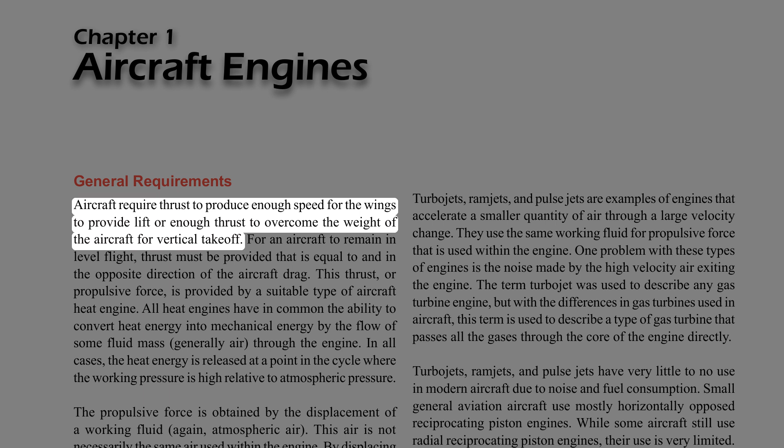Aircraft require thrust to produce enough speed for the wings to provide lift, or enough thrust to overcome the weight of the aircraft for vertical takeoff. For an aircraft to remain in level flight, thrust must be provided that is equal to and in the opposite direction of the aircraft drag.

This thrust, or propulsive force, is provided by a suitable type of aircraft heat engine. All heat engines have in common the ability to convert heat energy into mechanical energy by the flow of some fluid mass, generally air, through the engine. In all cases, the heat energy is released at a point in the cycle where the working pressure is high relative to atmospheric pressure. The propulsive force is obtained by the displacement of a working fluid, again, atmospheric air.

This air is not necessarily the same air used within the engine. By displacing air in a direction opposite to that in which the aircraft is propelled, thrust can be developed. This is an application of Newton's third law of motion, which states that for every action there is an equal and opposite reaction. So, as air is displaced to the rear, the aircraft is moved forward by this principle.

One misinterpretation of this principle is that air is pushing against the air behind the aircraft, making it move forward. This is not true. Rockets in space have no air to push against, yet they can produce thrust by using Newton's third law.

Atmospheric air is the principal fluid used for propulsion in every type of aircraft powerplant except the rocket, in which the total combustion gases are accelerated and displaced. The rocket must provide all the fuel and oxygen for combustion and does not depend on atmospheric air.

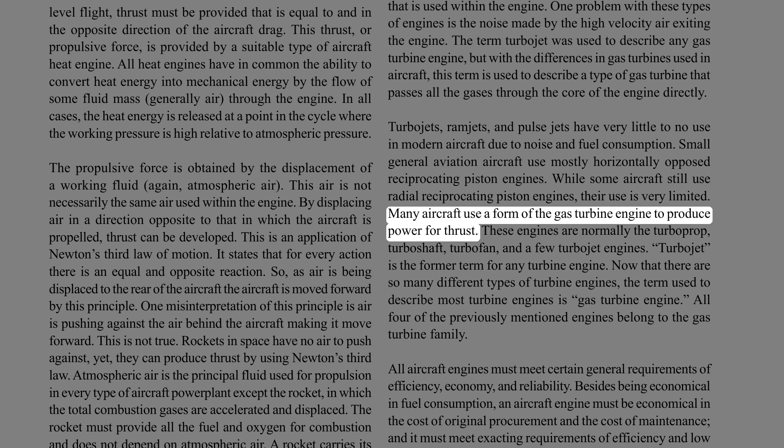Many aircraft use a form of the gas turbine engine to produce power for thrust. These engines are normally the turboprop, turboshaft, turbofan, and a few turbojet engines. Turbojet is the former term for any turbine engine. Now that there are so many different types of turbine engines, the term used to describe most turbine engines is gas turbine engine. All four of the previously mentioned engines belong to the gas turbine family.

All aircraft engines must meet certain general requirements of efficiency, economy, and reliability. Besides being economical in fuel consumption, an aircraft engine must be economical in the cost of original procurement and the cost of maintenance, and it must meet exacting requirements of efficiency and low weight-to-horsepower ratio.

It must be capable of sustained high power output with no sacrifice in reliability. It must also have the durability to operate for long periods of time between overhauls. It needs to be as compact as possible yet have easy accessibility for maintenance. It is required to be as vibration-free as possible and be able to cover a wide range of power output at various speeds and altitudes.

These requirements dictate the use of ignition systems that deliver the firing impulse to the spark plugs at the proper time in all kinds of weather and under other adverse conditions. Engine fuel delivery systems provide metered fuel at the correct proportion to the air ingested by the engine, regardless of the attitude, altitude, or type of weather in which the engine is operated.

The engine needs a type of oil system that delivers oil under the proper pressure to lubricate and cool all of the operating parts of the engine when it is running. Also, it must have a system of damping units to damp out the vibrations of the engine when it is operating. Power and weight: the useful output of all aircraft power plants is thrust, the force which propels the aircraft.

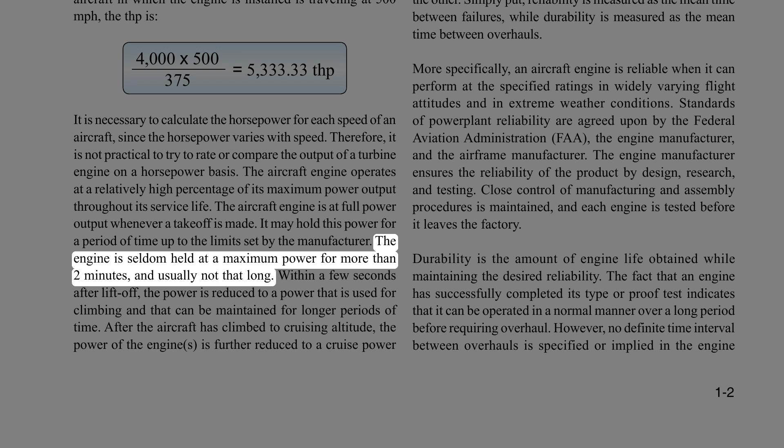The aircraft engine is at full power output whenever a takeoff is made. It may hold this power for a period of time up to the limits set by the manufacturer. The engine is seldom held at maximum power for more than 2 minutes, and usually not that long. Within a few seconds after liftoff, the power is reduced to a power that is used for climbing.

That can be maintained for longer periods of time. After the aircraft has climbed to cruising altitude, the power of the engines is further reduced to a cruise power, which can be maintained for the duration of the flight.

If the weight of an engine per brake horsepower, called the specific weight of the engine, is decreased, the useful load that an aircraft can carry and the performance of the aircraft obviously are increased. Every excess pound of weight carried by an aircraft engine reduces its performance.

Tremendous improvement in reducing the weight of the aircraft engine through improved design and metallurgy has resulted in reciprocating engines with a much improved power-to-weight ratio, or specific weight.

Fuel economy: the basic parameter for describing the fuel economy of aircraft engines is usually specific fuel consumption. Specific fuel consumption for gas turbines is the fuel flow, measured in pounds per hour, divided by thrust in pounds, and for reciprocating engines, the fuel flow in pounds per hour divided by brake horsepower. These are called thrust-specific fuel consumption and brake-specific fuel consumption, respectively.

Equivalent specific fuel consumption is used for the turboprop engine, and is the fuel flow in pounds per hour divided by a turboprop's equivalent shaft horsepower.

Comparisons can be made between the various engines on a specific fuel consumption basis. At low speed, the reciprocating and turboprop engines have better economy than the pure turbojet or turbofan engines. However, at high speed, because of losses in propeller efficiency, the reciprocating or turboprop engine's efficiency becomes limited above 400 miles per hour, less than that of the turbofan.

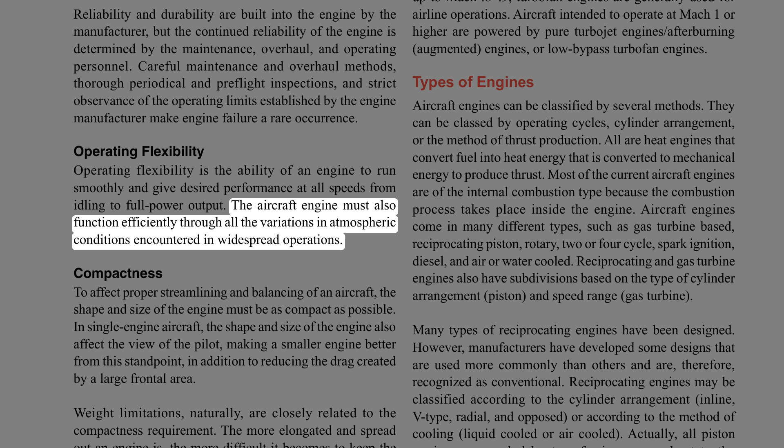Operating flexibility is the ability of an engine to run smoothly and give desired performance at all speeds, from idling to full power output. The aircraft engine must also function efficiently through all the variations in atmospheric conditions encountered in widespread operations.

Compactness. To effect proper streamlining and balancing of an aircraft, the shape and size of the engine must be as compact as possible. In single-engine aircraft, the shape and size of the engine also affect the view of the pilot, making a smaller engine better from this standpoint, in addition to reducing the drag created by a large frontal area.

Weight limitations, naturally, are closely related to the compactness requirement. The more elongated and spread out an engine is, the more difficult it becomes to keep the specific weight within the allowable limits. Powerplant selection, engine-specific weight and specific fuel consumption were discussed in the previous paragraphs, but for certain design requirements, the final powerplant selection may be based on factors other than those that can be discussed from an analytical point of view. For that reason, a general discussion of powerplant selection follows.

For aircraft whose cruising speed does not exceed 250 miles per hour, the reciprocating engine is the usual choice of powerplant. When economy is required in the low speed range, the conventional reciprocating engine is chosen because of its excellent efficiency and relatively low cost.

When high-altitude performance is required, the turbo-supercharged reciprocating engine may be chosen because it is capable of maintaining rated power to a high altitude, above 30,000 feet. Gas turbine engines operate most economically at high altitudes. Although in most cases the gas turbine engine provides superior performance, the cost of gas turbine engines is a limiting factor.

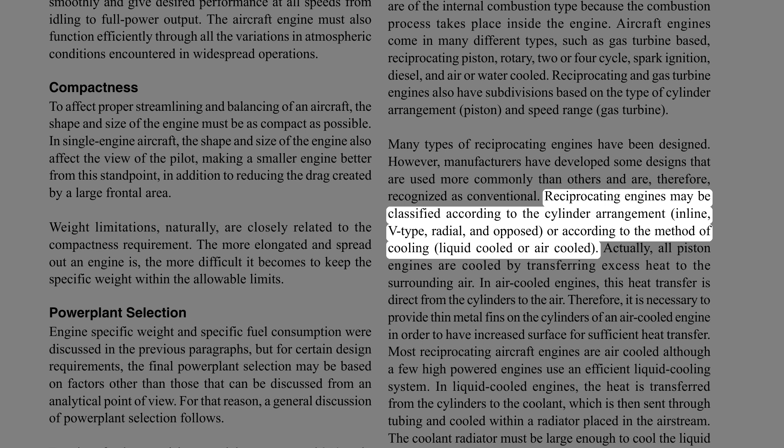Actually, all piston engines are cooled by transferring excess heat to the surrounding air. In air-cooled engines, this heat transfer is direct from the cylinders to the air. Therefore, it is necessary to provide thin metal fins on the cylinders of an air-cooled engine in order to have increased surface for sufficient heat transfer.

Most reciprocating aircraft engines are air-cooled, although a few high-powered engines use an efficient liquid cooling system. In liquid-cooled engines, the heat is transferred from the cylinders to the coolant, which is then sent through tubing and cooled within a radiator placed in the airstream. The coolant radiator must be large enough to cool the liquid efficiently.

The main problem with liquid cooling is the added weight of coolant, heat exchanger, radiator, and tubing to connect the components. Liquid-cooled engines do allow high power to be obtained from the engine safely.

Inline engines. An inline engine generally has an even number of cylinders, although some 3-cylinder engines have been constructed. This engine may be either liquid-cooled or air-cooled and has only one crankshaft, which is located either above or below the cylinders. If the engine is designed to operate with the cylinders below the crankshaft, it is called an inverted engine. The inline engine has a small frontal area and is better adapted to streamlining.

When mounted with the cylinders in an inverted position, it offers the added advantages of a shorter landing gear and greater pilot visibility. With increase in engine size, the air-cooled, inline type offers additional problems to provide proper cooling. Therefore, this type of engine is confined to low and medium horsepower engines used in very old light aircraft.

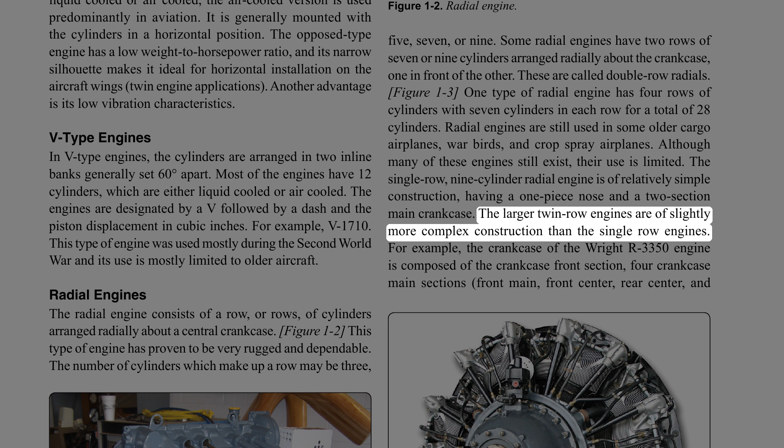The single-row, 9-cylinder radial engine is of relatively simple construction, having a one-piece nose and a 2-section main crankcase. The larger twin-row engines are of slightly more complex construction than the single-row engines. For example, the crankcase of the Wright R3350 engine is composed of the crankcase front section, 4 crankcase main sections, front main, front center, and rear main, rear cam and tappet housing, supercharger front housing, supercharger rear housing, and supercharger rear housing cover. Pratt & Whitney engines of comparable size incorporate the same basic sections, although the construction and the nomenclature differ considerably.

Reciprocating engines. Design and construction. The basic major components of a reciprocating engine are the crankcase, cylinders, pistons, connecting rods, valves, valve operating mechanism, and crankshaft. In the head of each cylinder are the valves and spark plugs. One of the valves is in a passage leading from the induction system, the other is in a passage leading to the exhaust system. Inside each cylinder is a movable piston connected to a crankshaft by a connecting rod. Figure 1-4 illustrates the basic parts of a reciprocating engine.

Crankcase section. The foundation of an engine is the crankcase. It contains the bearings and bearing supports in which the crankshaft revolves. Besides supporting itself, the crankcase must provide a tight enclosure for the lubricating oil and must support various external and internal mechanisms of the engine. It also provides support for attachment of the cylinder assemblies and the power plant to the aircraft.

It must be sufficiently rigid and strong to prevent misalignment of the crankshaft and its bearings. Cast or forged aluminum alloy is generally used for crankcase construction because it is light and strong. The crankcase is subjected to many variations of mechanical loads and other forces.

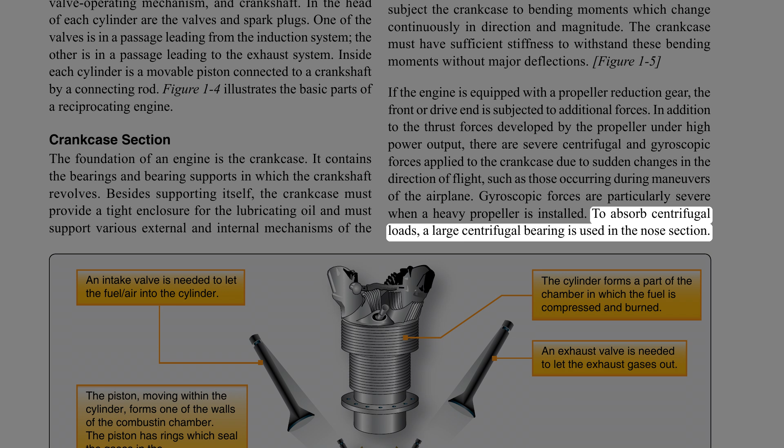To absorb centrifugal loads, a large centrifugal bearing is used in the nose section. The shape of the nose or front of the crankcase section varies considerably. In general, it is either tapered or round.

Depending upon the type of reciprocating engine, the nose or front area of the crankcase varies somewhat. If the propeller is driven directly by the crankshaft, less area is needed for this component of the engine. The crankcases used on engines having opposed or inline cylinder arrangements vary in form for different types of engines, but in general they are approximately cylindrical.

One or more sides are surfaced to serve as a base to which the cylinders are attached by means of cap screws, bolts, or studs. These accurately machined surfaces are frequently referred to as cylinder pads.

If the propeller is driven by reduction gearing, gears that slow down the speed of the propeller relative to the engine, more area is required to house the reduction gears. A tapered nose section is used quite frequently on direct drive, low-powered engines, because extra space is not required to house the propeller reduction gears.

Crankcase nose sections are usually cast of either aluminum alloy or magnesium. The crankcase nose section on engines that develop from 1,000 to 2,500 horsepower is usually larger to house reduction gears, and sometimes ribbed to get as much strength as possible.

The governor is used to control propeller speed and blade angle. The mounting of the propeller governor varies. On some engines, it is located on the rear section, although this complicates the installation, especially if the propeller is operated or controlled by oil pressure, because of the distance between the governor and propeller.

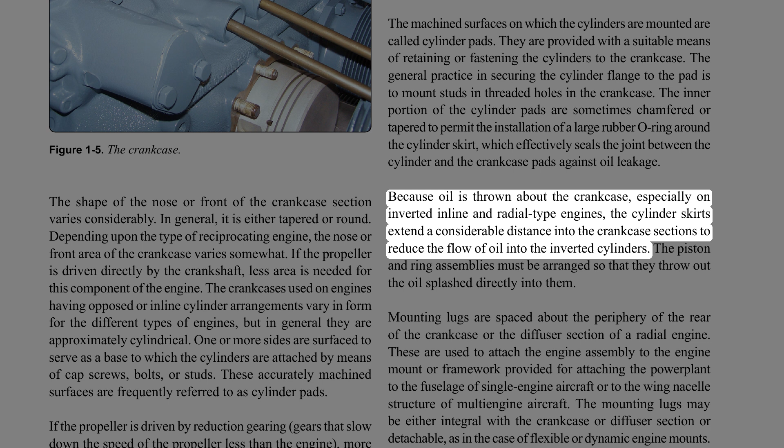Because oil is thrown about the crankcase, especially on inverted inline and radial type engines, the cylinder skirts extend a considerable distance into the crankcase sections to reduce the flow of oil into the inverted cylinders. The piston and ring assemblies must be arranged so that they throw out the oil splashed directly into them.

Mounting lugs are spaced about the periphery of the rear of the crankcase or the diffuser section of a radial engine. These are used to attach the engine assembly to the engine mount or framework provided for attaching the power plant to the fuselage of single-engine aircraft or to the wing nacelle structure of multi-engine aircraft.

The mounting lugs may be either integral with the crankcase or diffuser section, or detachable, as in the case of flexible or dynamic engine mounts. The mounting arrangement supports the entire power plant including the propeller, and therefore is designed to provide ample strength for rapid maneuvers or other loadings.

Because of the elongation and contraction of the cylinders, the intake pipes which carry the mixture from the diffuser chamber through the intake valve ports are arranged to provide a slip joint which must be leak-proof.

The atmospheric pressure on the outside of the case of an unsupercharged engine is higher than on the inside, especially when the engine is operating at idling speed. If the engine is equipped with a supercharger and operated at full throttle, the pressure is considerably higher on the inside than on the outside of the case.

If the slip joint connection has a slight leakage, the engine may idle fast due to a slight leaning of the mixture. If the leak is quite large, it may not idle at all. At open throttle, a small leak probably would not be noticeable in operation of the engine, but the slight leaning of the air-fuel mixture might cause detonation or damage to the valves and valve seats.

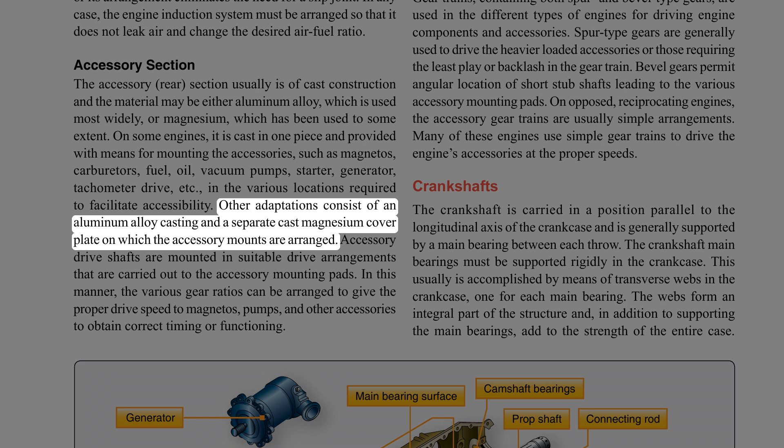Other adaptations consist of an aluminum alloy casting and a separate cast magnesium cover plate on which the accessory mounts are arranged. Accessory drive shafts are mounted in suitable drive arrangements that are carried out to the accessory mounting pads. In this manner, the various gear ratios can be arranged to give the proper drive speed to magnetos, pumps, and other accessories to obtain correct timing or functioning.

Accessory gear trains. Gear trains, containing both spur and bevel type gears, are used in the different types of engines for driving engine components and accessories. Spur-type gears are generally used to drive the heavier loaded accessories, or those requiring the least play or backlash in the gear train. Bevel gears permit angular location of short stub shafts leading to the various accessory mounting pads.

On opposed, reciprocating engines, the accessory gear trains are usually simple arrangements. Many of these engines use simple gear trains to drive the engine's accessories at the proper speeds.

Crankshafts. The crankshaft is carried in a position parallel to the longitudinal axis of the crankcase and is generally supported by a main bearing between each throw. The crankshaft main bearings must be supported rigidly in the crankcase. This usually is accomplished by means of transverse webs in the crankcase, one for each main bearing.

The webs form an integral part of the structure and, in addition to supporting the main bearings, add to the strength of the entire case.

The crankcase is divided into two sections in a longitudinal plane. This division may be in the plane of the crankshaft, so that one half of the main bearing, and sometimes camshaft bearings, are carried in one section of the case and the other half in the opposite section.

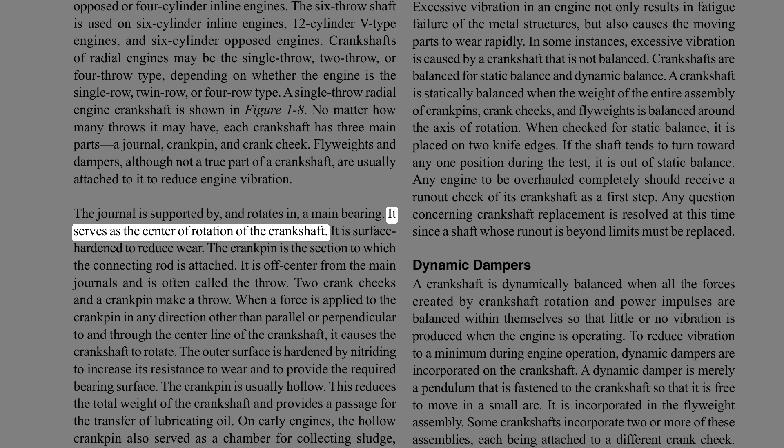The journal is supported by, and rotates in, a main bearing. It serves as the center of rotation of the crankshaft. It is surface hardened to reduce wear.

The crankpin is the section to which the connecting rod is attached. It is off-center from the main journals and is often called the throw. Two crank cheeks and a crankpin make a throw.

When a force is applied to the crankpin in any direction other than parallel or perpendicular to and through the center line of the crankshaft, it causes the crankshaft to rotate. The outer surface is hardened by nitriding to increase its resistance to wear and to provide the required bearing surface. The crankpin is usually hollow.

This reduces the total weight of the crankshaft and provides a passage for the transfer of lubricating oil. On early engines, the hollow crankpin also served as a chamber for collecting sludge, carbon deposits, and other foreign material. Centrifugal force threw these substances to the outside of the chamber and kept them from reaching the connecting rod bearing surface. Due to the use of ashless dispersant oils, newer engines no longer use sludge chambers.

On some engines, a passage is drilled in the crank cheek to allow oil from the hollow crankshaft to be sprayed on the cylinder walls. The crank cheek connects the crankpin to the main journal. In some designs, the cheek extends beyond the journal and carries a flyweight to balance the crankshaft. The crank cheek must be of sturdy construction to obtain the required rigidity between the crankpin and the journal.

In all cases, the type of crankshaft and the number of crankpins must correspond with the cylinder arrangement of the engine. The position of the cranks on the crankshaft in relation to the other cranks of the same shaft is expressed in degrees. The simplest crankshaft is the single-throw or 360 degree type. This type is used in a single-row radial engine. It can be constructed in one or two pieces. Two main bearings, one on each end, are provided when this type of crankshaft is used.

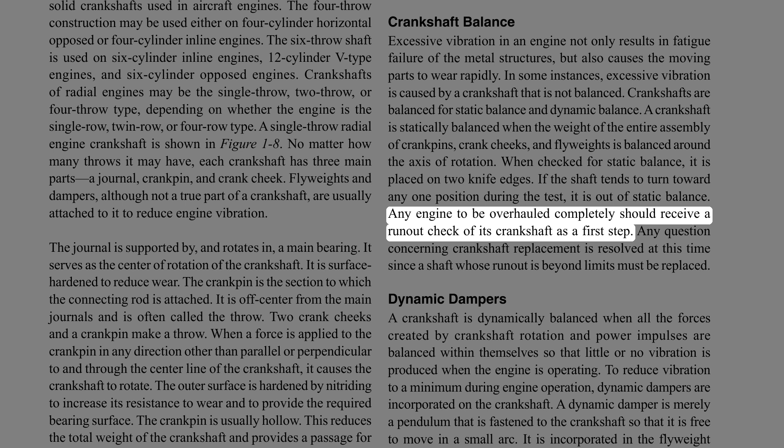Any engine to be overhauled completely should receive a runout check of its crankshaft as a first step. Any question concerning crankshaft replacement is resolved at this time, since a shaft whose runout is beyond limits must be replaced.

Dynamic dampers. A crankshaft is dynamically balanced when all the forces created by crankshaft rotation and power impulses are balanced within themselves so that little or no vibration is produced when the engine is operating. To reduce vibration to a minimum during engine operation, dynamic dampers are incorporated on the crankshaft.

A dynamic damper is merely a pendulum that is fastened to the crankshaft so that it is free to move in a small arc. It is incorporated in the flyweight assembly. Some crankshafts incorporate two or more of these assemblies, each being attached to a different crank cheek.

The distance the pendulum moves, and thus its vibrating frequency, corresponds to the frequency of the power impulses of the engine. When the vibration frequency of the crankshaft occurs, the pendulum oscillates out of time with the crankshaft vibration, thus reducing vibration to a minimum.

The construction of the dynamic damper used in one engine consists of a movable slotted steel flyweight attached to the crank cheek. Two spool-shaped steel pins extend into the slot and pass through oversized holes in the flyweight and crank cheek. The difference in diameter between the pins and the holes provides a pendulum effect. An analogy of the functioning of a dynamic damper is shown in Figure 1-9.

Connecting rods. The connecting rod is the link that transmits forces between the piston and the crankshaft. Connecting rods must be strong enough to remain rigid under load, yet light enough to reduce the inertia forces produced when the rod and piston stop, change direction, and start again at the end of each stroke. There are four types of connecting rod assemblies: plain, fork and blade, master and articulated, and split type.

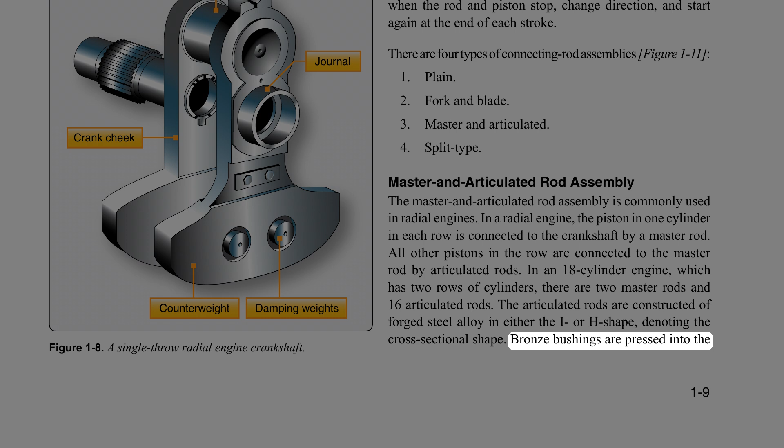The articulated rods are constructed of forged steel alloy in either the I or H shape, denoting the cross-sectional shape. Bronze bushings are pressed into the bores in each end of the articulated rod to provide knuckle pin and piston pin bearings.

The master rod serves as the connecting link between the piston pin and the crankpin. The crankpin end, or big end, contains the crankpin or master rod bearing. Flanges around the big end provide for the attachment of the articulated rods, which are attached to the master rod by knuckle pins pressed into holes in the master rod flanges during assembly. A plain bearing, usually called a piston pin bushing, is installed in the piston end of the master rod to receive the piston pin.

When a crankshaft of the split spline or split clamp type is employed, a one-piece master rod is used. The master and articulated rods are assembled and then installed on the crankpin, and the crankshaft sections are then joined together.

In engines that use the one-piece type of crankshaft, the big end of the master rod is split, as is the master rod bearing. The main part of the master rod is installed on the crankpin, then the bearing cap is set in place and bolted to the master rod.

The centers of the knuckle pins do not coincide with the center of the crankpin. Thus, while the crankpin center describes a true circle for each revolution of the crankshaft, the centers of the knuckle pins describe an elliptical path. These elliptical paths are symmetrical about a center line through the master rod cylinder. The major diameters of the ellipses are not the same, so the link rods have varying degrees of angularity relative to the center of the crankthrow.

Because of the varying angularity of the link rods and the elliptical motion of the knuckle pins, all pistons do not move an equal amount in each cylinder for a given number of degrees of crankthrow movement. This variation in piston position between cylinders can have considerable effect on engine operation. To minimize these effects on valve and ignition timing, the knuckle pinholes in the master rod flange are not equidistant from the center of the crankpin, offsetting to an extent the effect of the link rod angularity. Another method of minimizing the adverse effects on engine operation is to use a compensated magneto.

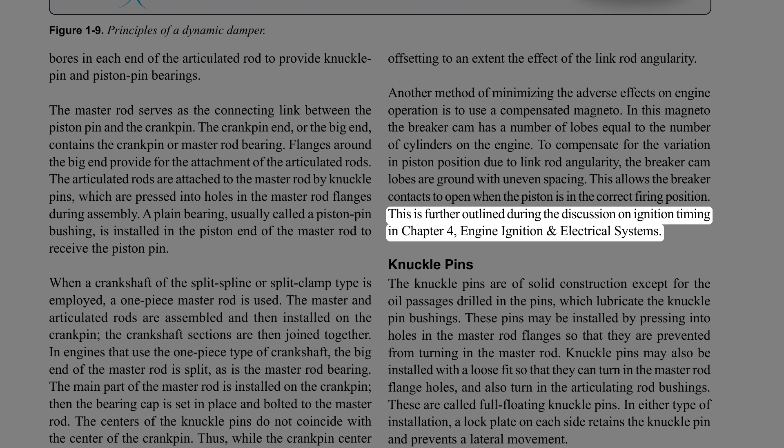In this magneto, the breaker cam has a number of lobes equal to the number of cylinders on the engine. To compensate for the variation in piston position due to link rod angularity, the breaker cam lobes are ground with uneven spacing. This allows the breaker contacts to open when the piston is in the correct firing position. This is further outlined during the discussion on ignition timing in Chapter 4, Engine Ignition and Electrical Systems.

Knuckle pins are of solid construction except for the oil passages drilled in the pins, which lubricate the knuckle pin bushings. These pins may be installed by pressing into holes in the master rod flanges so they are prevented from turning in the master rod. Knuckle pins may also be installed with a loose fit so that they can turn in the master rod flange holes, and also turn in the articulating rod bushings. These are called full floating knuckle pins. In either type of installation, a lock plate on each side retains the knuckle pin and prevents lateral movement.

Plain type connecting rods are used in inline and opposed engines. The end of the rod attached to the crankpin is fitted with a cap and a two-piece bearing, held on by bolts or studs. To maintain proper fit and balance, connecting rods should always be replaced in the same cylinder and in the same relative position.

Fork and blade rod assembly. The fork and blade rod assembly is used primarily in V-type engines. The forked rod is split at the crankpin end to allow space for the blade rod to fit between the prongs. A single two-piece bearing is used on the crankshaft end of the rod. This type of connecting rod is not used much on modern engines.

Pistons. The piston of a reciprocating engine is a cylindrical member which moves back and forth within a steel cylinder, acting as a moving wall within the combustion chamber. As the piston moves down, it draws in the air-fuel mixture. As it moves upward, it compresses the charge, ignition occurs, and the expanding gases force the piston downward. This force is transmitted to the crankshaft through the connecting rod. On the return upward stroke, the piston forces the exhaust gases from the cylinder and the cycle repeats. Piston construction: the majority of aircraft engine pistons are machined from aluminum alloy forgings.

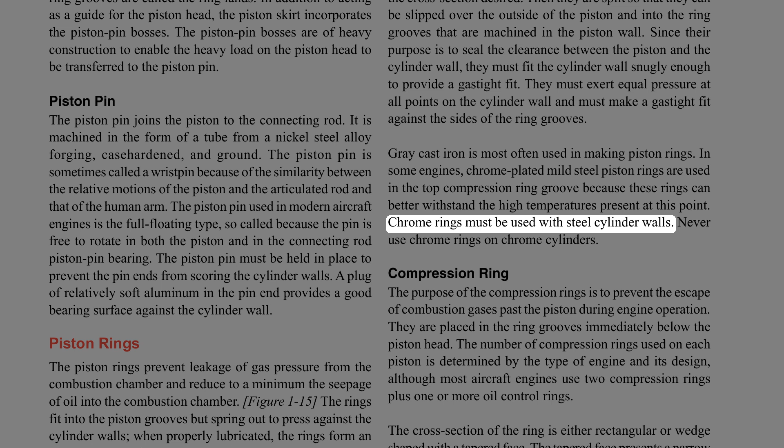Gray cast iron is most often used in making piston rings. In some engines, chrome-plated mild steel piston rings are used in the top compression ring groove because these rings can better withstand the high temperatures present at this point. Chrome rings must be used with steel cylinder walls. Never use chrome rings on chrome cylinders.

Compression ring. The purpose of the compression rings is to prevent the escape of combustion gases past the piston during engine operation. They are placed in the ring grooves immediately below the piston head. The number of compression rings used on each piston is determined by the type of engine and its design, although most aircraft engines use 2 compression rings plus 1 or more oil control rings.

The cross-section of the ring is either rectangular or wedge-shaped with a tapered face. The tapered face presents a narrow bearing edge to the cylinder wall, which helps to reduce friction and provide better sealing. Oil control rings.

Oil control rings are placed in the grooves immediately below the compression rings and above the piston pin bores. There may be one or more oil control rings per piston. Two rings may be installed in the same groove, or they may be installed in separate grooves.

Oil control rings regulate the thickness of the oil film on the cylinder wall. If too much oil enters the combustion chamber, it burns and leaves a thick coating of carbon on the combustion chamber walls, the piston head, the spark plugs, and the valve heads. This carbon can cause the valves and piston rings to stick if it enters the ring grooves or valve guides. In addition, the carbon can cause spark plug misfiring as well as detonation, pre-ignition, or excessive oil consumption.

To allow the surplus oil to return to the crankcase, holes are drilled in the bottom of the oil control piston ring grooves or in the lands next to these grooves.

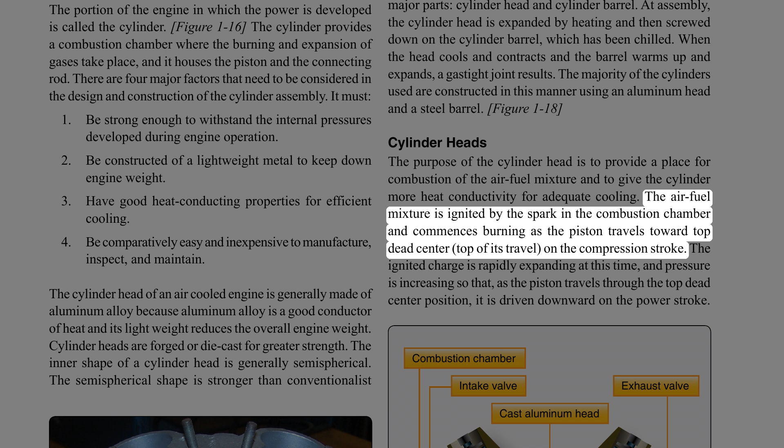Cylinder heads. The purpose of the cylinder head is to provide a place for combustion of the air-fuel mixture and to give the cylinder more heat conductivity for adequate cooling. The air-fuel mixture is ignited by the spark in the combustion chamber and commences burning as the piston travels toward top dead center, top of its travel, on the compression stroke.

The ignited charge is rapidly expanding at this time, and pressure is increasing so that, as the piston travels through the top dead center position, it is driven downward on the power stroke. The intake and exhaust valve ports are located in the cylinder head along with the spark plugs and the intake and exhaust valve actuating mechanisms.

After the cylinder head is cast, the spark plug bushings, valve guides, rocker arm bushings, and valve seats are installed in the cylinder head. Spark plug openings may be fitted with bronze or steel bushings that are shrunk and screwed into the openings. Stainless steel heli-coil spark plug inserts are used in many engines currently manufactured. Bronze or steel valve guides are usually shrunk or screwed into drilled openings in the cylinder head to provide guides for the valve stems. These are generally located at an angle to the center line of the cylinder.

The valve seats are circular rings of hardened metal that protect the relatively soft metal of the cylinder head from the hammering action of the valves as they open and close, and from the exhaust gases. The cylinder heads of air-cooled engines are subjected to extreme temperatures. It is therefore necessary to provide adequate cooling fin area and to use metals that conduct heat rapidly. Cylinder heads of air-cooled engines are usually cast or forged. Aluminum alloy is used in the construction for a number of reasons.

It is well adapted for casting or for the machining of deep, closely spaced fins, and it is more resistant than most metals to the corrosive attack of tetraethyl lead in gasoline.

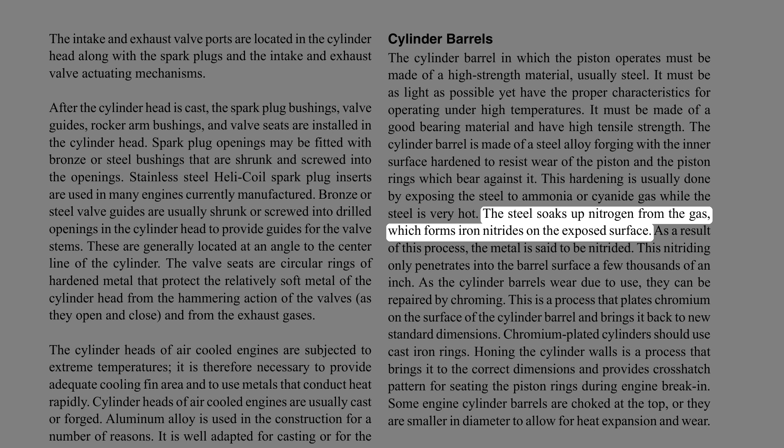The cylinder barrel is made of a steel alloy forging with the inner surface hardened to resist wear of the piston and the piston rings which bear against it. This hardening is usually done by exposing the steel to ammonia or cyanide gas while the steel is very hot. The steel soaks up nitrogen from the gas, which forms iron nitrides on the exposed surface. As a result of this process, the metal is said to be nitrided. This nitriding only penetrates into the barrel surface a few thousandths of an inch.

As the cylinder barrels wear due to use, they can be repaired by chroming. This is a process that plates chromium on the surface of the cylinder barrel and brings it back to new standard dimensions. Chromium-plated cylinders should use cast iron rings.

Honing the cylinder walls is a process that brings it to the correct dimensions and provides a crosshatch pattern for seating the piston rings during engine break-in.

Some engine cylinder barrels are choked at the top, or they are smaller in diameter to allow for heat expansion and wear. In some instances, the barrel has threads on the outside surface at one end so that it can be screwed into the cylinder head. The cooling fins are machined as an integral part of the barrel and have limits on repair and service.

Cylinder numbering. Occasionally it is necessary to refer to the left or right side of the engine or to a particular cylinder. Therefore, it is necessary to know the engine directions and how cylinders of an engine are numbered. The propeller shaft end of the engine is always the front end, and the accessory end is the rear end, regardless of how the engine is mounted in an aircraft.

When referring to the right side or left side of an engine, always assume the view is from the rear or accessory end. As seen from this position, crankshaft rotation is referred to as either clockwise or counterclockwise.

Inline and V-type engine cylinders are usually numbered from the rear. In V engines, the cylinder banks are known as the right bank and the left bank, as viewed from the accessory end.

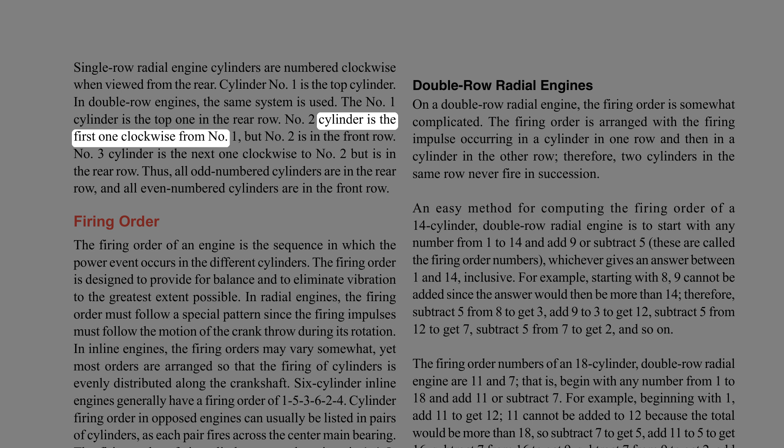Valve construction. The valves in the cylinders of an aircraft engine are subjected to high temperatures, corrosion, and operating stresses. Thus, the metal alloy in the valves must be able to resist all these factors.

Because intake valves operate at lower temperatures than exhaust valves, they can be made of chrome-nickel steel. Exhaust valves are usually made of nichrome, silchrome, or cobalt chromium steel because these materials are much more heat resistant.

The valve head has a ground face that forms a seal against the ground valve seat in the cylinder head when the valve is closed. The face of the valve is usually ground to an angle of either 30 degrees or 45 degrees.

In some engines, the intake valve face is ground to an angle of 30 degrees, and the exhaust valve face is ground to a 45 degrees angle.

Valve faces are often made more durable by the application of a material called stellite. About 1/16 inch of this alloy is welded to the valve face and ground to the correct angle. Stellite is resistant to high-temperature corrosion and also withstands the shock and wear associated with valve operation. Some engine manufacturers use a nichrome facing on the valves.

This serves the same purpose as the stellite material. The valve stem acts as a pilot for the valve head and rides in the valve guide installed in the cylinder head for this purpose. The valve stem is surface hardened to resist wear.

The neck is the part that forms the junction between the head and the stem. The tip of the valve is hardened to withstand the hammering of the valve rocker arm as it opens the valve. A machined groove on the stem near the tip receives the split ring stem keys, which form a lock ring to hold the valve spring retaining washer in place.

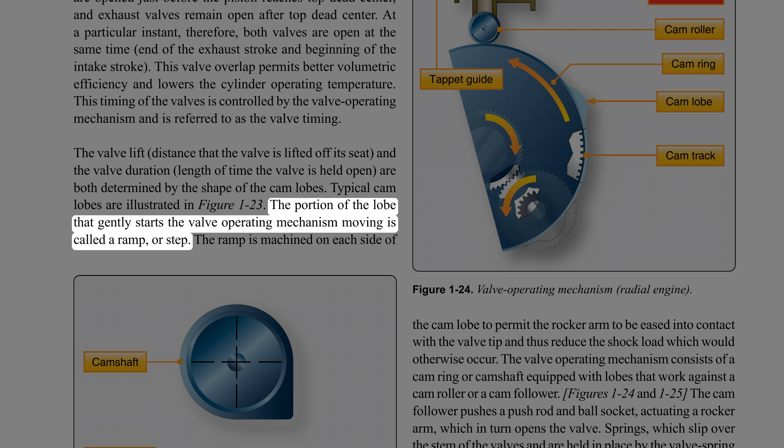Typical cam lobes are illustrated in Figure 1-23. The portion of the lobe that gently starts the valve operating mechanism moving is called a ramp or step. The ramp is machined on each side of the cam lobe to permit the rocker arm to be eased into contact with the valve tip, reducing the shock load which would otherwise occur.

The valve operating mechanism consists of a cam ring or camshaft equipped with lobes that work against a cam roller or a cam follower, shown in Figures 1-24 and 1-25. The cam follower pushes a pushrod and ball socket, actuating a rocker arm, which in turn opens the valve. Springs, which slip over the stem of the valves and are held in place by the valve spring retaining washer and stem key, close each valve and push the valve mechanism in the opposite direction.

Cam rings. The valve mechanism of a radial engine is operated by one or two cam rings, depending upon the number of rows of cylinders. In a single-row radial engine, one ring with a double cam track is used; one track operates the intake valves, the other operates the exhaust valves.

The cam ring is a circular piece of steel with a series of cams or lobes on the outer surface. The surface of these lobes and the space between them, on which the cam rollers ride, is known as the cam track. As the cam ring revolves, the lobes cause the cam roller to raise the tappet in the tappet guide, thereby transmitting the force through the pushrod and rocker arm to open the valve.

In a single-row radial engine, the cam ring is usually located between the propeller reduction gearing and the front end of the power section. In a twin-row radial engine, a second cam for the operation of the valves in the rear row is installed between the rear end of the power section and the supercharger section.

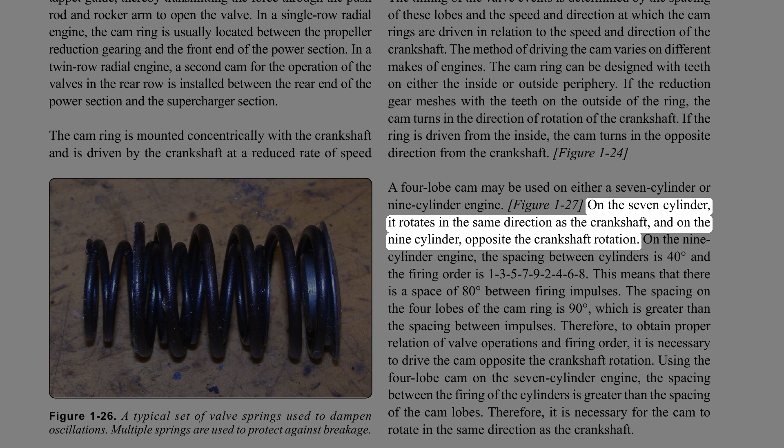On the 9-cylinder engine, the spacing between cylinders is 40 degrees and the firing order is 1,3,5,7,9,2,4,6,8. This means there is a space of 80 degrees between firing impulses. The spacing on the 4 lobes of the cam ring is 90 degrees, which is greater than the spacing between impulses. Therefore, to obtain proper relation of valve operations and firing order, it is necessary to drive the cam opposite the crankshaft rotation.

Using the 4-lobe cam on the 7-cylinder engine, the spacing between the firing of the cylinders is greater than the spacing of the cam lobes. Therefore, it is necessary for the cam to rotate in the same direction as the crankshaft.

Camshaft: the valve mechanism of an opposed engine is operated by a camshaft. The camshaft is driven by a gear that mates with another gear attached to the crankshaft. The camshaft always rotates at half the crankshaft speed.

As the camshaft revolves, the lobes cause the tappet assembly to rise in the tappet guide, transmitting the force through the pushrod and rocker arm to open the valve.

Tappet assembly: the tappet assembly consists of a cylindrical tappet, which slides in and out in a tappet guide installed in one of the crankcase sections around the cam ring; a tappet roller, which follows the contour of the cam ring and lobes; a tappet ball socket or pushrod socket; and a tappet spring.

The function of the tappet assembly is to convert the rotational movement of the cam lobe into reciprocating motion and to transmit this motion to the pushrod, rocker arm, and then to the valve tip, opening the valve at the proper time. The purpose of the tappet spring is to take up the clearance between the rocker arm and the valve tip to reduce the shock load when the valve is opened.

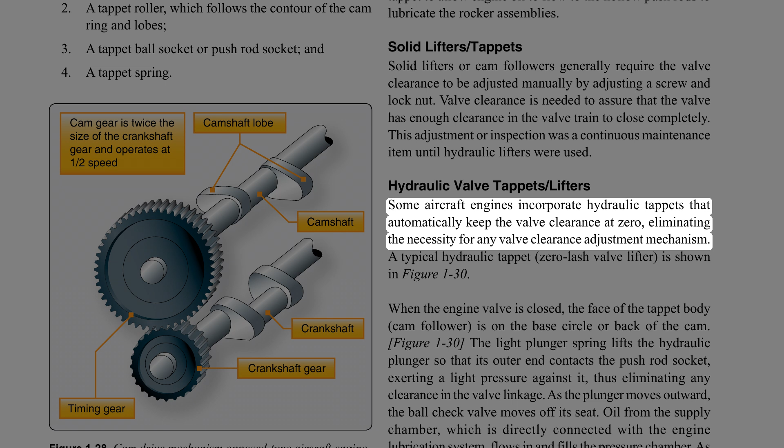Hydraulic valve tappets, lifters. Some aircraft engines incorporate hydraulic tappets that automatically keep the valve clearance at zero, eliminating the necessity for any valve clearance adjustment mechanism. A typical hydraulic tappet, zero-lash valve lifter, is shown in Figure 1-30.

When the engine valve is closed, the face of the tappet body, cam follower, is on the base circle or back of the cam. The light plunger spring lifts the hydraulic plunger so that its outer end contacts the pushrod socket, exerting a light pressure against it, thus eliminating any clearance in the valve linkage.

As the plunger moves outward, the ball check valve moves off its seat. Oil from the supply chamber, which is directly connected with the engine lubrication system, flows in and fills the pressure chamber. As the camshaft rotates, the cam pushes the tappet body and the hydraulic lifter cylinder outward.

This action forces the ball check valve onto its seat. Thus, the body of oil trapped in the pressure chamber acts as a cushion. During the interval when the engine valve is off its seat, a predetermined leakage occurs between plunger and cylinder bore, which compensates for any expansion or contraction in the valve train.

Immediately after the engine valve closes, the amount of oil required to fill the pressure chamber flows in from the supply chamber, preparing for another cycle of operation.

Hydraulic valve lifters are normally adjusted at the time of overhaul. They are assembled dry, no lubrication, clearances checked, and adjustments are usually made by using push rods of different lengths. A minimum and maximum valve clearance is established. Any measurement between these extremes is acceptable, but approximately halfway between the extremes is desired. Hydraulic valve lifters require less maintenance, are better lubricated, and operate more quietly than the screw adjustment type.

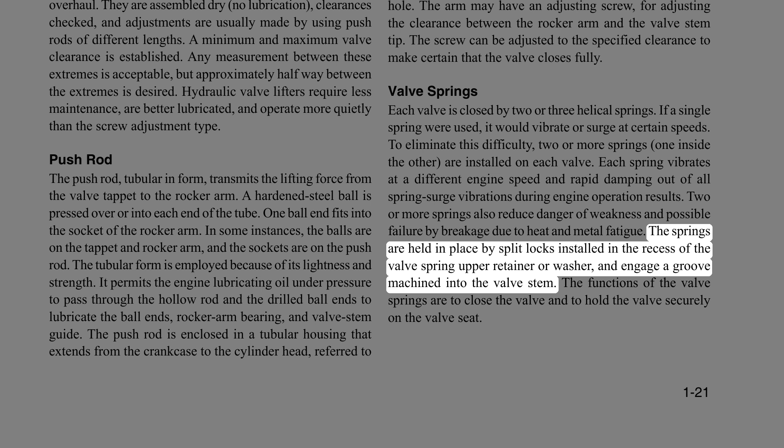2 or more springs also reduce danger of weakness and possible failure by breakage due to heat and metal fatigue. The springs are held in place by split locks installed in the recess of the valve spring upper retainer or washer, and engage a groove machined into the valve stem. The functions of the valve springs are to close the valve and to hold the valve securely on the valve seat.

Bearings. A bearing is any surface which supports or is supported by another surface. A good bearing must be composed of material that is strong enough to withstand the pressure imposed on it and should permit the other surface to move with a minimum of friction and wear. The parts must be held in position within very close tolerances to provide efficient and quiet operation, and yet allow freedom of motion.

Lubricated bearings of many types are used to accomplish this, and at the same time reduce friction of moving parts so that power loss is not excessive and to prevent high oil temperatures caused by failed or failing bearings. Bearings are required to take radial loads, thrust loads, or a combination of the two.

An example of a radial load would be a rotating shaft being held or contained in one position on a radial plane. Thrust load would be the rotating shaft being contained from moving axially along the shaft's axis. These radial and thrust loads are illustrated in Figure 1 to 32.

There are 2 ways in which bearing surfaces move in relation to each other. One is by the sliding movement of one metal against the other, sliding friction, and the second is for one surface to roll over the other, rolling friction.

The 3 different types of bearings in general use are plain, roller, and ball. Plain bearings are generally used for the crankshaft, cam ring, camshaft, connecting rods, and the accessory drive shaft bearings. Such bearings are usually subjected to radial loads only, although some have been designed to take thrust loads.

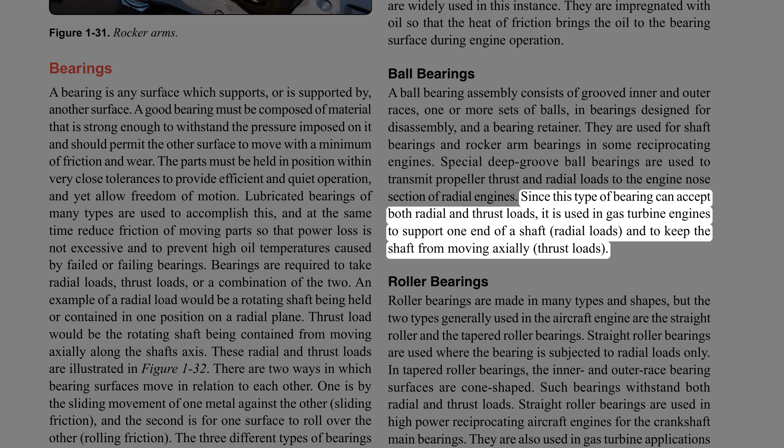Ball bearings. A ball bearing assembly consists of grooved inner and outer races, one or more sets of balls, in bearings designed for disassembly, and a bearing retainer. They are used for shaft bearings and rocker arm bearings in some reciprocating engines. Special deep groove ball bearings are used to transmit propeller thrust and radial loads to the engine nose section of radial engines. Since this type of bearing can accept both radial and thrust loads, it is used in gas turbine engines to support one end of a shaft, radial loads, and to keep the shaft from moving axially, thrust loads.

Roller bearings. Roller bearings are made in many types and shapes, but the two types generally used in the aircraft engine are the straight roller and the tapered roller bearings. Straight roller bearings are used where the bearing is subjected to radial loads only. In tapered roller bearings, the inner and outer race bearing surfaces are cone-shaped. Such bearings withstand both radial and thrust loads. Straight roller bearings are used in high-power reciprocating aircraft engines for the crankshaft main bearings. They are also used in gas turbine applications where radial loads are high. Generally, a rotating shaft in a gas turbine engine is supported by a deep groove ball bearing, for radial and thrust loads, on one end, and a straight roller bearing, for radial loads only, on the other end.

Propeller reduction gearing. The increased brake horsepower delivered by a high horsepower engine results partly from increased crankshaft RPM. It is therefore necessary to provide reduction gears to limit the propeller rotation speed to a value at which efficient operation is obtained. Whenever the speed of the blade tips approaches the speed of sound, the efficiency of the propeller decreases rapidly. Reduction gearing for engines allows the engine to operate at a higher RPM, developing more power, while slowing down the propeller RPM. This prevents the propeller efficiency from decreasing.

Since reduction gearing must withstand extremely high stresses, the gears are machined from steel forgings. Many types of reduction gearing systems are in use. The three types most commonly used are spur planetary, bevel planetary, and spur and pinion. Figure 1 to 34. The spur planetary reduction gearing consists of a large driving gear, or sun gear, splined, and sometimes shrunk, to the crankshaft, a large stationary gear called a bell gear, and a set of small spur planetary pinion gears mounted on a carrier ring.

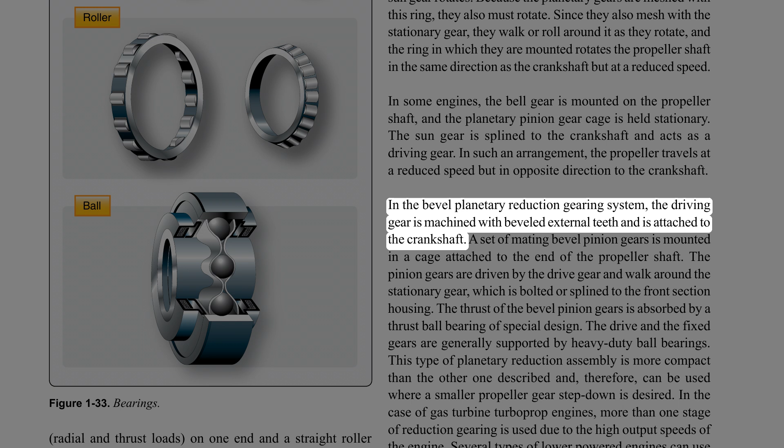In the bevel planetary reduction gearing system, the driving gear is machined with beveled external teeth and is attached to the crankshaft. A set of mating bevel pinion gears is mounted in a cage attached to the end of the propeller shaft. The pinion gears are driven by the drive gear and walk around the stationary gear, which is bolted or splined to the front section housing.

The thrust of the bevel pinion gears is absorbed by a thrust ball bearing of special design. The drive and the fixed gears are generally supported by heavy-duty ball bearings. This type of planetary reduction assembly is more compact than the other one described and, therefore, can be used where a smaller propeller gear step down is desired.

In the case of gas turbine turboprop engines, more than one stage of reduction gearing is used due to the high output speeds of the engine. Several types of lower-powered engines can use the spur and pinion reduction gear arrangement.

Propeller shafts may be of three major types: tapered, splined, or flanged. Tapered shafts are identified by taper numbers. Splined and flanged shafts are identified by SAE numbers.

The propeller shaft of most low-power output engines is forged as part of the crankshaft. It is tapered, and a milled slot is provided so that the propeller hub can be keyed to the shaft. The keyway and key index of the propeller are in relation to the number one cylinder top dead center. The end of the shaft is threaded to receive the propeller retaining nut. Tapered propeller shafts are common on older and smaller engines.

The propeller shaft of high-output radial engines is generally splined. It is threaded on one end for a propeller hub nut. The thrust bearing, which absorbs propeller thrust, is located around the shaft and transmits the thrust to the nose section housing. The shaft is threaded for attaching the thrust-bearing retaining nut. On the portion protruding from the housing, between the two sets of threads, splines are located to receive the splined propeller hub. The shaft is generally machined from a steel alloy forging throughout its length.

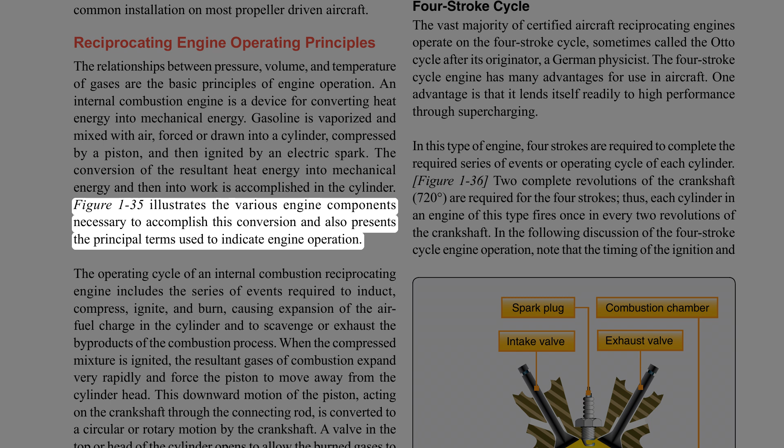Reciprocating engine operating principles. The relationships between pressure, volume, and temperature of gases are the basic principles of engine operation. An internal combustion engine is a device for converting heat energy into mechanical energy. Gasoline is vaporized and mixed with air, forced or drawn into a cylinder, compressed by a piston, and then ignited by an electric spark. The conversion of the resultant heat energy into mechanical energy and then into work is accomplished in the cylinder. The figure illustrates the various engine components necessary to accomplish this conversion and also presents the principal terms used to indicate engine operation.

The operating cycle of an internal combustion reciprocating engine includes the series of events required to induct, compress, ignite, and burn, causing expansion of the air-fuel charge in the cylinder and to scavenge or exhaust the byproducts of the combustion process. When the compressed mixture is ignited, the resultant gases of combustion expand very rapidly and force the piston to move away from the cylinder head. This downward motion of the piston, acting on the crankshaft through the connecting rod, is converted to a circular or rotary motion by the crankshaft.

A valve in the top or head of the cylinder opens to allow the burned gases to escape, and the momentum of the crankshaft and the propeller forces the piston back up in the cylinder where it is ready for the next event in the cycle. Another valve in the cylinder head then opens to let in a fresh charge of the air-fuel mixture. The valve allowing for the escape of the burning exhaust gases is called the exhaust valve, and the valve which lets in the fresh charge of the air-fuel mixture is called the intake valve. These valves are opened and closed mechanically at the proper times by the valve operating mechanism.

Therefore, the order of the 5 events of a 4-stroke cycle engine are intake, compression, ignition, power, and exhaust. The bore of a cylinder is its inside diameter. The stroke is the distance the piston moves from one end of the cylinder to the other, specifically from top dead center, TDC, to bottom dead center, BDC, or vice versa.

Operating cycles. There are several operating cycles in use: 4-stroke, 2-stroke, rotary, diesel. 4-stroke cycle: the vast majority of certified aircraft reciprocating engines operate on the 4-stroke cycle, sometimes called the Otto cycle after its originator, a German physicist. The 4-stroke cycle engine has many advantages for use in aircraft. One advantage is that it lends itself readily to high performance through supercharging. In this type of engine, 4 strokes are required to complete the required series of events or operating cycle of each cylinder. 2 complete revolutions of the crankshaft, 720 degrees, are required for the 4 strokes.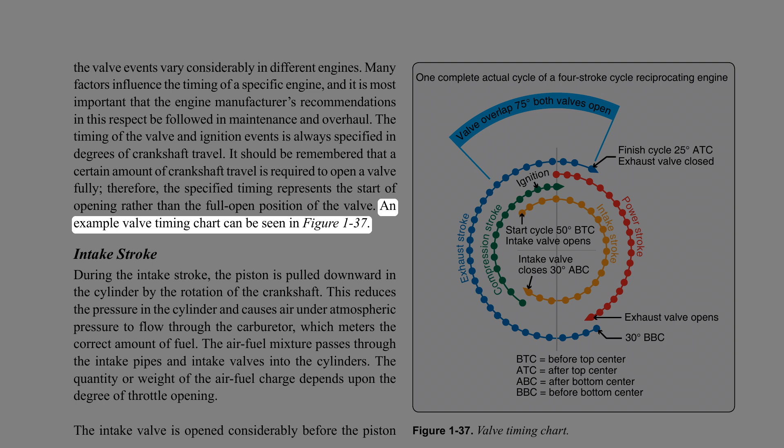Intake stroke. During the intake stroke, the piston is pulled downward in the cylinder by the rotation of the crankshaft. This reduces the pressure in the cylinder and causes air under atmospheric pressure to flow through the carburetor, which meters the correct amount of fuel. The air-fuel mixture passes through the intake pipes and intake valves into the cylinders. The quantity or weight of the air-fuel charge depends upon the degree of throttle opening.

The intake valve is opened considerably before the piston reaches TDC on the exhaust stroke, in order to induce a greater quantity of the air-fuel charge into the cylinder and thus increase the horsepower. The distance the valve may be opened before TDC, however, is limited by several factors, such as the possibility that hot gases remaining in the cylinder from the previous cycle may flash back into the intake pipe and the induction system. In all high-power aircraft engines, both the intake and the exhaust valves are off the valve seats at TDC at the start of the intake stroke.

As mentioned above, the intake valve opens before TDC on the exhaust stroke, valve lead, and the closing of the exhaust valve is delayed considerably after the piston has passed TDC and has started the intake stroke, valve lag. This timing is called valve overlap and is designed to aid in cooling the cylinder internally by circulating the cool incoming air-fuel mixture, to increase the amount of air-fuel mixture induced into the cylinder, and to aid in scavenging the byproducts of combustion from the cylinder.

The intake valve is timed to close about 50 to 75 degrees past BDC on the compression stroke, depending upon the specific engine, to allow the momentum of the incoming gases to charge the cylinder more completely. Because of the comparatively large volume of the cylinder above the piston when the piston is near BDC, the slight upward travel of the piston during this time does not have a great effect on the incoming flow of gases. This late timing can be carried too far because the gases may be forced back through the intake valve and defeat the purpose of the late closing.

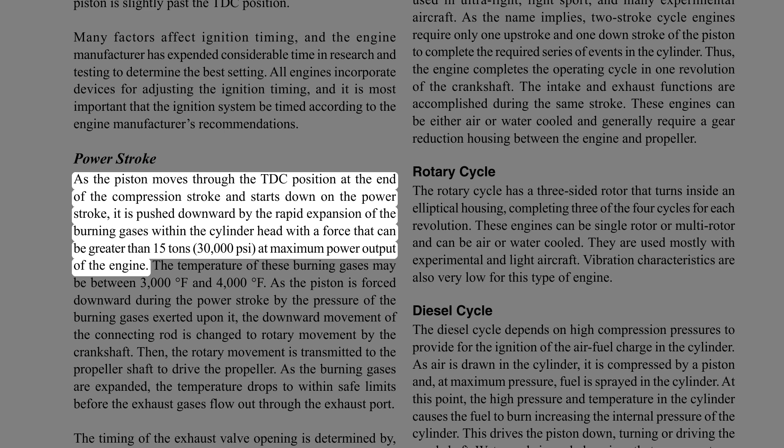Power stroke. As the piston moves through the TDC position at the end of the compression stroke and starts down on the power stroke, it is pushed downward by the rapid expansion of the burning gases within the cylinder head with a force that can be greater than 15 tons, 30,000 psi, at maximum power output of the engine. The temperature of these burning gases may be between 3,000 and 4,000 degrees Fahrenheit.

As the piston is forced downward during the power stroke by the pressure of the burning gases exerted upon it, the downward movement of the connecting rod is changed to rotary movement by the crankshaft. Then, the rotary movement is transmitted to the propeller shaft to drive the propeller.

As the burning gases are expanded, the temperature drops to within safe limits before the exhaust gases flow out through the exhaust port. The timing of the exhaust valve opening is determined by, among other considerations, the desirability of using as much of the expansive force as possible and of scavenging the cylinder as completely and rapidly as possible.

The exhaust valve is opened considerably before BDC on the power stroke, on some engines at 50 to 75 degrees before BDC, while there is still some pressure in the cylinder. This timing allows the pressure to force gases out of the exhaust port as soon as possible, freeing the cylinder of waste heat after the desired expansion has been obtained and avoiding overheating of the cylinder and piston. Thorough scavenging is very important, because any exhaust products remaining in the cylinder dilute the incoming air-fuel charge at the start of the next cycle.

Exhaust stroke: as the piston travels through BDC at the completion of the power stroke and starts upward on the exhaust stroke, it begins to push the burned exhaust gases out the exhaust port. The speed of the exhaust gases leaving the cylinder creates a low pressure in the cylinder. This reduced pressure speeds the flow of the fresh air-fuel charge into the cylinder as the intake valve begins to open. The intake valve opening is timed to occur at 8 to 55 degrees before TDC on the exhaust stroke on various engines.

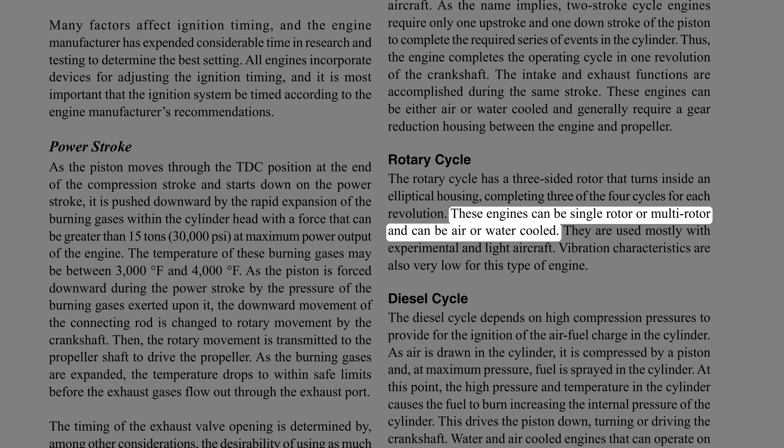Rotary cycle: the rotary cycle has a three-sided rotor that turns inside an elliptical housing, completing 3 of the 4 cycles for each revolution. These engines can be single-rotor or multi-rotor and can be air or water-cooled. They are used mostly with experimental and light aircraft. Vibration characteristics are also very low for this type of engine.

Diesel cycle: the diesel cycle depends on high compression pressures to provide for the ignition of the air-fuel charge in the cylinder. As air is drawn into the cylinder, it is compressed by a piston and, at maximum pressure, fuel is sprayed in the cylinder. At this point, the high pressure and temperature in the cylinder cause the fuel to burn, increasing the internal pressure of the cylinder. This drives the piston down, turning or driving the crankshaft. Water and air-cooled engines that can operate on jet fuel or kerosene use a version of the diesel cycle. There are many types of diesel cycles in use, including 2-stroke and 4-stroke diesels.

Reciprocating engine power and efficiencies. All aircraft engines are rated according to their ability to do work and produce power. This section presents an explanation of work and power and how they are calculated. Also discussed are the various efficiencies that govern the power output of a reciprocating engine.

Work: a physicist defines work as force times distance. Work done by a force acting on a body is equal to the magnitude of the force multiplied by the distance through which the force acts. Work is measured by several standards, the most common unit being the foot-pound. If a 1-pound mass is raised 1 foot, 1 foot-pound of work has been performed. The greater the mass and/or the greater the distance, the greater the work performed.

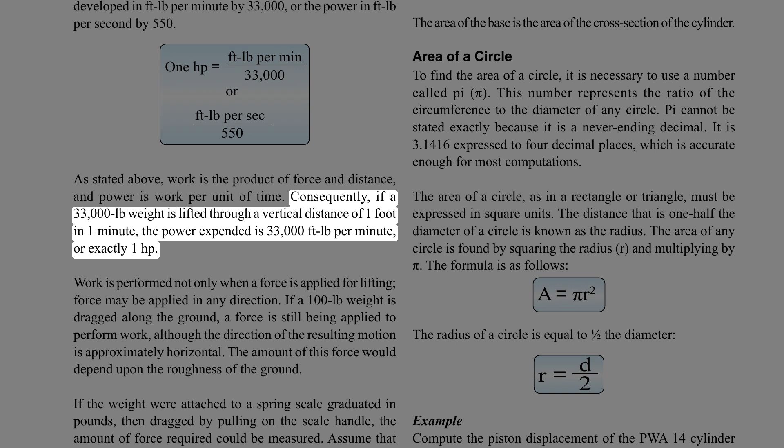As stated, work is the product of force and distance, and power is work per unit of time. Consequently, if a 33,000-pound weight is lifted through a vertical distance of 1 foot in 1 minute, the power expended is 33,000 foot-pounds per minute, or exactly 1 horsepower. Work is performed not only when a force is applied for lifting; force may be applied in any direction. If a 100-pound weight is dragged along the ground, a force is still being applied to perform work, although the direction of the resulting motion is approximately horizontal. The amount of this force would depend upon the roughness of the ground.

If the weight were attached to a spring scale graduated in pounds, then dragged by pulling on the scale handle, the amount of force required could be measured. Assume that the force required is 90 pounds, and the 100-pound weight is dragged 660 feet in 2 minutes. The amount of work performed in the 2 minutes is 59,400 foot-pounds, or 29,700 foot-pounds per minute. Since 1 horsepower is 33,000 foot-pounds per minute, the horsepower expended in this case is 29,700 divided by 33,000.

This equals 0.9 horsepower. Piston displacement: when other factors remain equal, the greater the piston displacement, the greater the maximum horsepower an engine is capable of developing.

When a piston moves from BDC to TDC, it displaces a specific volume. The volume displaced by the piston is known as piston displacement and is expressed in cubic inches for most American-made engines and cubic centimeters for others. The piston displacement of one cylinder may be obtained by multiplying the area of the cross-section of the cylinder by the total distance the piston moves in the cylinder in one stroke. For multi-cylinder engines, this product is multiplied by the number of cylinders to get the total piston displacement of the engine.

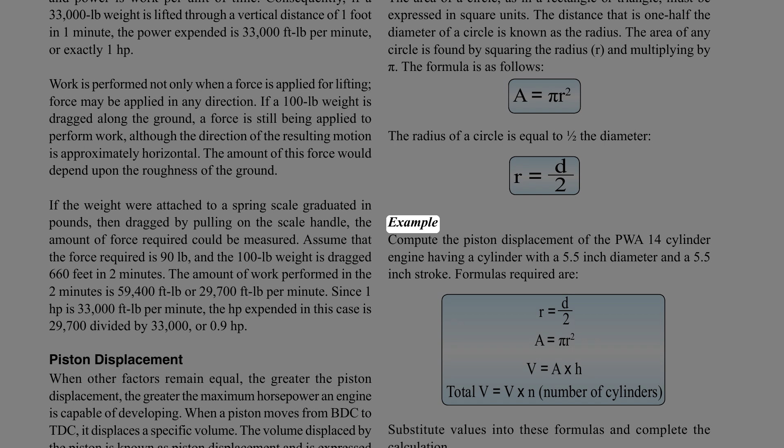Example: compute the piston displacement of the PWA 14-cylinder engine having a cylinder with a 5.5-inch diameter and a 5.5-inch stroke. Formulas required are given; substitute values into these formulas and complete the calculation. Round it off to the next whole number. Total piston displacement equals 1,829 cubic inches.

Another method of calculating the piston displacement uses the diameter of the piston instead of the radius in the formula for the area of the base. From this point on, the calculations are identical to the preceding example.

Compression ratio: all internal combustion engines must compress the air-fuel mixture to receive a reasonable amount of work from each power stroke. The air-fuel charge in the cylinder can be compared to a coil spring, in that the more it is compressed, the more work it is potentially capable of doing. The compression ratio of an engine is a comparison of the volume of space in a cylinder when the piston is at the bottom of the stroke to the volume of space when the piston is at the top of the stroke. This comparison is expressed as a ratio, hence the term compression ratio.

Compression ratio is a controlling factor in the maximum horsepower developed by an engine, but it is limited by present-day fuel grades and the high engine speeds and manifold pressures required for takeoff. For example, if there are 140 cubic inches of space in the cylinder when the piston is at the bottom, and there are 20 cubic inches of space when the piston is at the top of the stroke, the compression ratio would be 140 to 20. If this ratio is expressed in fraction form, it would be 140/20, or 7 to 1, usually represented as 7 to 1.

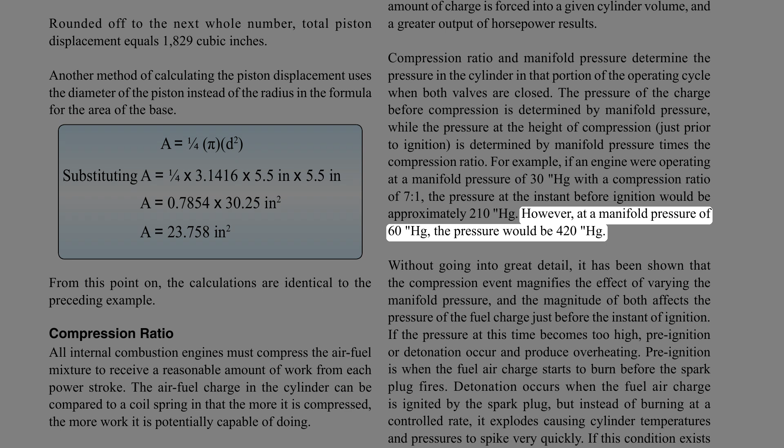The pressure of the charge before compression is determined by manifold pressure, while the pressure at the height of compression, just prior to ignition, is determined by manifold pressure times the compression ratio. For example, if an engine were operating at a manifold pressure of 30 Hg with a compression ratio of 7:1, the pressure at the instant before ignition would be approximately 210 Hg. However, at a manifold pressure of 60 Hg, the pressure would be 420 Hg.

Without going into great detail, it has been shown that the compression event magnifies the effect of varying the manifold pressure, and the magnitude of both affects the pressure of the fuel charge just before the instant of ignition. If the pressure at this time becomes too high, pre-ignition or detonation occur and produce overheating.

Pre-ignition is when the fuel air charge starts to burn before the spark plug fires. Detonation occurs when the fuel air charge is ignited by the spark plug, but instead of burning at a controlled rate, it explodes, causing cylinder temperatures and pressures to spike very quickly. If this condition exists for very long, the engine can be damaged or destroyed.

One of the reasons for using engines with high compression ratios is to obtain long-range fuel economy, to convert more heat energy into useful work than is done in engines of low compression ratio. Since more heat of the charge is converted into useful work, less heat is absorbed by the cylinder walls. This factor promotes cooler engine operation, which in turn increases the thermal efficiency. Here again, a compromise is needed between the demand for fuel economy and the demand for maximum horsepower without detonation.

Some manufacturers of high compression engines suppress detonation at high manifold pressures by using high-octane fuel and limiting maximum manifold pressure. Indicated horsepower. The indicated horsepower produced by an engine is the horsepower calculated from the indicated mean effective pressure and the other factors which affect the power output of an engine. Indicated horsepower is the power developed in the combustion chambers without reference to friction losses within the engine.

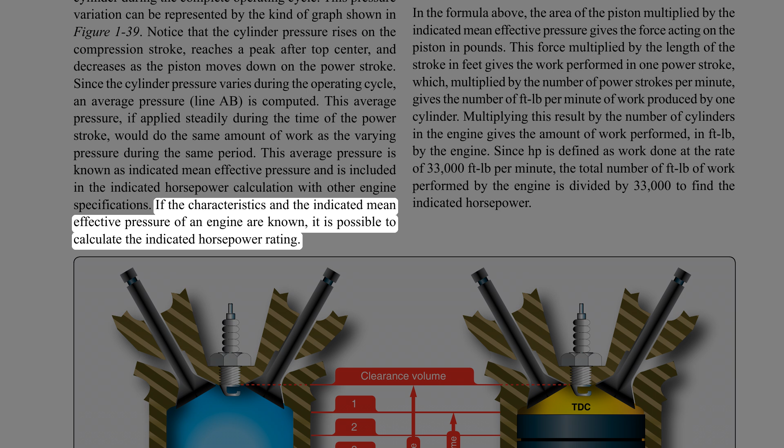The indicated horsepower for a 4-stroke cycle engine can be calculated from the following formula, in which the letter symbols in the numerator are arranged to spell the word plank to assist in memorizing the formula.

In the formula above, the area of the piston multiplied by the indicated mean effective pressure gives the force acting on the piston in pounds. This force multiplied by the length of the stroke in feet gives the work performed in 1 power stroke, which, multiplied by the number of power strokes per minute, gives the number of foot-pounds per minute of work produced by one cylinder. Multiplying this result by the number of cylinders in the engine gives the amount of work performed, in foot-pounds, by the engine.

Since HP is defined as work done at the rate of 33,000 foot-pounds per minute, the total number of foot-pounds of work performed by the engine is divided by 33,000 to find the indicated horsepower.

Brake horsepower. The indicated horsepower calculation discussed in the preceding paragraph is the theoretical power of a frictionless engine. The total horsepower lost in overcoming friction must be subtracted from the indicated horsepower to arrive at the actual horsepower delivered to the propeller. The power delivered to the propeller for useful work is known as brake horsepower, bhp.

The difference between indicated and brake horsepower is known as friction horsepower, which is the horsepower required to overcome mechanical losses, such as the pumping action of the pistons, the friction of the pistons, and the friction of all other moving parts.

The measurement of an engine's bhp involves the measurement of a quantity known as torque or twisting moment. Torque is the product of a force and the distance of the force from the axis about which it acts, or torque is a measure of load and is properly expressed in pound-inches, lb-in, or pound-feet, lb-ft. Torque should not be confused with work, which is expressed in inch-pounds, in lb, or foot-pounds, ft lb.

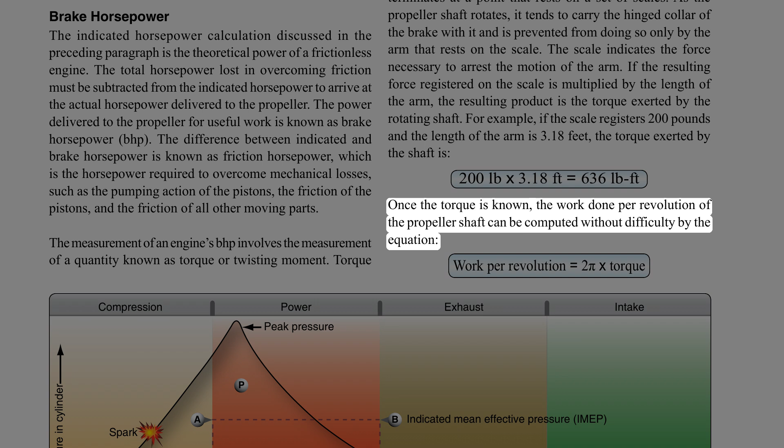If the resulting force registered on the scale is multiplied by the length of the arm, the resulting product is the torque exerted by the rotating shaft. For example, if the scale registers 200 pounds and the length of the arm is 3.18 feet, the torque exerted by the shaft is calculated. Once the torque is known, the work done per revolution of the propeller shaft can be computed without difficulty by the equation.

If work per revolution is multiplied by the RPM, the result is work per minute, or power. If the work is expressed in foot-pounds per minute, this quantity is divided by 33,000. The result is the brake horsepower of the shaft.

As long as the friction between the brake collar and propeller shaft drum is great enough to impose an appreciable load on the engine, but is not great enough to stop the engine, it is not necessary to know the amount of friction between the collar and drum to compute the bhp. If there were no load imposed, there would be no torque to measure, and the engine would run away. If the imposed load is so great that the engine stalls, there may be considerable torque to measure, but there is no RPM. In either case, it is impossible to measure the bhp of the engine.

However, if a reasonable amount of friction exists between the brake drum and the collar and the load is then increased, the tendency of the propeller shaft to carry the collar and arm about with it becomes greater, thus imposing a greater force upon the scales. As long as the torque increase is proportional to the RPM decrease, the horsepower delivered at the shaft remains unchanged.

This can be seen from the equation in which 2 pi and 33,000 are constants and torque and RPM are variables. If the change in RPM is inversely proportional to the change in torque, their product remains unchanged, and bhp remains unchanged. This is important. It shows that horsepower is a function of both torque and RPM, and can be changed by changing either torque, RPM, or both.

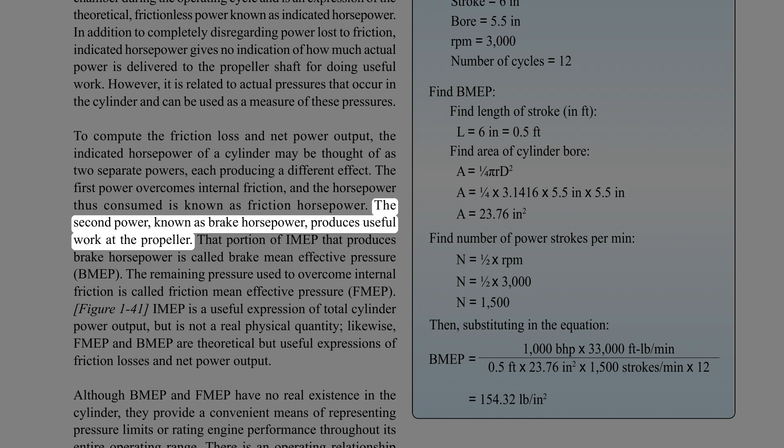To compute the friction loss and net power output, the indicated horsepower of a cylinder may be thought of as two separate powers, each producing a different effect. The first power overcomes internal friction, and the horsepower thus consumed is known as friction horsepower. The second power, known as brake horsepower, produces useful work at the propeller.

That portion of IMEP that produces brake horsepower is called brake mean effective pressure, BMEP. The remaining pressure used to overcome internal friction is called friction mean effective pressure, FMEP. IMEP is a useful expression of total cylinder power output, but is not a real physical quantity. Likewise, FMEP and BMEP are theoretical but useful expressions of friction losses and net power.

Although BMEP and FMEP have no real existence in the cylinder, they provide a convenient means of representing pressure limits or rating engine performance throughout its entire operating range. There is an operating relationship between IMEP, BMEP, and FMEP.

One of the basic limitations placed on engine operation is the pressure developed in the cylinder during combustion. In the discussion of compression ratios and indicated mean effective pressure, it was found that, within limits, increased pressure resulted in increased power. It was also noted that if the cylinder pressure were not controlled within close limits, it would impose dangerous internal loads that might result in engine failure.

Therefore, it is important to have a means of determining these cylinder pressures as a protective measure and for efficient application of power. If the BHP is known, the BMEP can be computed by means of the following equation.

Thrust horsepower can be considered the result of the engine and the propeller working together. If a propeller could be designed to be 100% efficient, the thrust and the BHP would be the same. However, the efficiency of the propeller varies with the engine speed, attitude, altitude, temperature, and airspeed. Thus, the ratio of the thrust horsepower and the BHP delivered to the propeller shaft will never be equal.

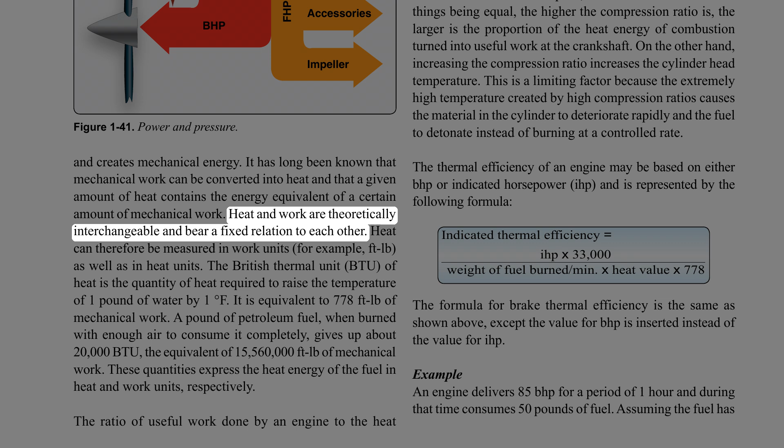It has long been known that mechanical work can be converted into heat and that a given amount of heat contains the energy equivalent of a certain amount of mechanical work. Heat and work are theoretically interchangeable and bear a fixed relation to each other. Heat can therefore be measured in work units, for example, foot-pounds, as well as in heat units.

The British Thermal Unit, BTU, of heat is the quantity of heat required to raise the temperature of 1 pound of water by 1 degree Fahrenheit. It is equivalent to 778 foot-pounds of mechanical work.

A pound of petroleum fuel, when burned with enough air to consume it completely, gives up about 20,000 BTU, the equivalent of 15,560,000 foot-pounds of mechanical work. These quantities express the heat energy of the fuel in heat and work units, respectively.

The ratio of useful work done by an engine to the heat energy of the fuel it uses, expressed in work or heat units, is called the thermal efficiency of the engine. If 2 similar engines use equal amounts of fuel, the engine that converts into work the greater part of the energy in the fuel, having higher thermal efficiency, delivers the greater amount of power.

Furthermore, the engine that has the higher thermal efficiency has less waste heat to dispose of to the valves, cylinders, pistons, and cooling system of the engine. A high thermal efficiency also means low specific fuel consumption and, therefore, less fuel for a flight of a given distance at a given power.

Thus, the practical importance of a high thermal efficiency is threefold, and it constitutes one of the most desirable features in the performance of an aircraft engine.

Of the total heat produced, 25 to 30% is utilized for power output, 15 to 20% is lost in cooling, heat radiated from cylinder head fins, 5 to 10% is lost in overcoming friction of moving parts, and 40 to 45% is lost through the exhaust.

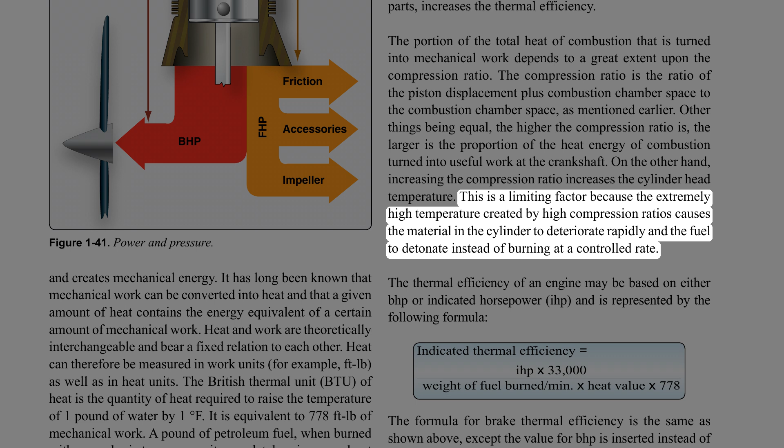The thermal efficiency of an engine may be based on either BHP or indicated horsepower, IHP, and is represented by the following formula. The formula for brake thermal efficiency is the same as shown above, except the value for BHP is inserted instead of the value for IHP.

Example: An engine delivers 85 bhp for a period of 1 hour and during that time consumes 50 pounds of fuel. Assuming the fuel has a heat content of 18,800 BTU per pound, find the thermal efficiency of the engine.

Reciprocating engines are only about 34% thermally efficient, that is, they transform only about 34% of the total heat potential of the burning fuel into mechanical energy. The remainder of the heat is lost through the exhaust gases, the cooling system, and the friction within the engine. Thermal distribution in a reciprocating engine is illustrated in Figure 1-42.

Mechanical efficiency is the ratio that shows how much of the power developed by the expanding gases in the cylinder is actually delivered to the output shaft. It is a comparison between the bhp and the IHP. It can be expressed by the following formula.

Brake horsepower is the useful power delivered to the propeller shaft. Indicated horsepower is the total HP developed in the cylinders. The difference between the two is friction horsepower, FHP, the power lost in overcoming friction.

The factor that has the greatest effect on mechanical efficiency is the friction within the engine itself. The friction between moving parts in an engine remains practically constant throughout an engine's speed range. Therefore, the mechanical efficiency of an engine is highest when the engine is running at the RPM at which maximum bhp is developed. Mechanical efficiency of the average aircraft reciprocating engine approaches 90%.

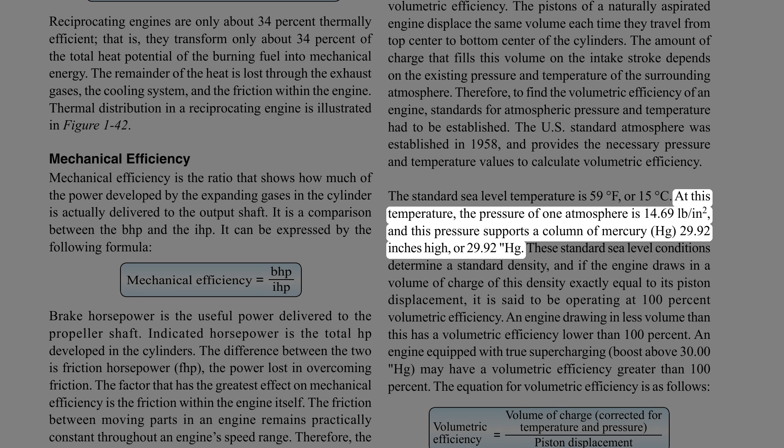Therefore, to find the volumetric efficiency of an engine, standards for atmospheric pressure and temperature had to be established. The U.S. standard atmosphere was established in 1958 and provides the necessary pressure and temperature values to calculate volumetric efficiency. The standard sea level temperature is 59 degrees Fahrenheit, or 15 degrees Celsius. At this temperature, the pressure of 1 atmosphere is 14.69 pounds per square inch, and this pressure supports a column of mercury, Hg, 29.92 inches high, or 29.92 Hg.

These standard sea level conditions determine a standard density, and if the engine draws in a volume of charge of this density exactly equal to its piston displacement, it is said to be operating at 100% volumetric efficiency. An engine drawing in less volume than this has a volumetric efficiency lower than 100%. An engine equipped with true supercharging, boost above 30.00 Hg, may have a volumetric efficiency greater than 100%.

The equation for volumetric efficiency is as follows. Many factors decrease volumetric efficiency, including part throttle operation, long intake pipes of small diameter, sharp bends in the induction system, carburetor air temperature too high, cylinder head temperature too high, incomplete scavenging, and improper valve timing.

Propulsive efficiency: a propeller is used with an engine to provide thrust. The engine supplies bhp through a rotating shaft, and the propeller absorbs the bhp and converts it into thrust HP. In this conversion, some power is wasted. Since the efficiency of any machine is the ratio of useful power output to the power input, propulsive efficiency, in this case, propeller efficiency, is the ratio of thrust HP to bhp.

On the average, thrust HP constitutes approximately 80% of the bhp. The other 20% is lost in friction and slippage. Controlling the blade angle of the propeller is the best method of obtaining maximum propulsive efficiency for all conditions encountered in flight. During takeoff, when the aircraft is moving at low speeds and when maximum power and thrust are required, a low propeller blade angle gives maximum thrust.

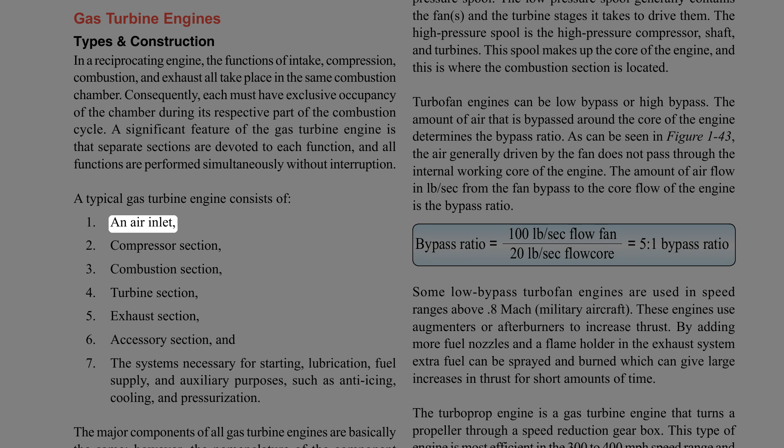A typical gas turbine engine consists of an air inlet, compressor section, combustion section, turbine section, exhaust section, accessory section, and the systems necessary for starting, lubrication, fuel supply, and auxiliary purposes, such as anti-icing, cooling, and pressurization.

The major components of all gas turbine engines are basically the same, however, the nomenclature of the component parts of various engines currently in use varies slightly due to the difference in each manufacturer's terminology. These differences are reflected in the applicable maintenance manuals.

One of the greatest single factors influencing the construction features of any gas turbine engine is the type of compressor or compressors for which the engine is designed. 4 types of gas turbine engines are used to propel and power aircraft.

They are the turbofan, turboprop, turboshaft, and turbojet. The term turbojet was used to describe any gas turbine engine used in aircraft. As gas turbine technology evolved, these other engine types were developed to take the place of the pure turbojet engine. The turbojet engine has problems with noise and fuel consumption in the speed range that airliners fly, 0.8 Mach. Due to these problems, use of pure turbojet engines is very limited.

So, almost all airliner-type aircraft use a turbofan engine. It was developed to turn a large fan or set of fans at the front of the engine and produces about 80% of the thrust from the engine. This engine was quieter and had better fuel consumption in this speed range.

Turbofan engines have more than one shaft in the engine. Many are 2-shaft engines. This means that there are 2 sets of compressors and turbines that drive them. These 2-shafted engines use 2 spools. A spool is a compressor and a shaft and turbines that drive the compressor.

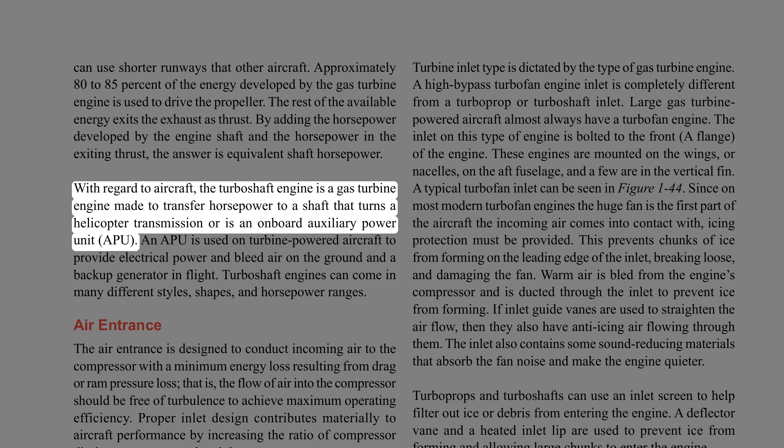shaft that turns a helicopter transmission or is an onboard auxiliary power unit, APU. An APU is used on turbine-powered aircraft to provide electrical power and bleed air on the ground and a backup generator in flight. Turboshaft engines can come in many different styles, shapes, and horsepower ranges.

Air entrance. The air entrance is designed to conduct incoming air to the compressor with a minimum energy loss resulting from drag or ram pressure loss. That is, the flow of air into the compressor should be free of turbulence to achieve maximum operating efficiency. Proper inlet design contributes materially to aircraft performance by increasing the ratio of compressor discharge pressure to duct inlet pressure.

This is also referred to as the compressor pressure ratio, which is the outlet pressure divided by the inlet pressure. The amount of air passing through the engine depends on three factors: compressor speed (RPM), the forward speed of the aircraft, and the density of the ambient surrounding air.

Turbine inlet type is dictated by the type of gas turbine engine. A high bypass turbofan engine inlet is completely different from a turboprop or turboshaft inlet. Large gas turbine-powered aircraft almost always have a turbofan engine, with the inlet bolted to a flange at the front of the engine. These engines are mounted on the wings, nacelles, the aft fuselage, and a few in the vertical fin. A typical turbofan inlet can be seen in Figure 1-44.

Since on most modern turbofan engines the huge fan is the first part the incoming air contacts, icing protection must be provided. This prevents chunks of ice from forming on the leading edge of the inlet, breaking loose, and damaging the fan. Warm air is bled from the engine's compressor and ducted through the inlet to prevent ice from forming. If inlet guide vanes are used to straighten the airflow, they also have anti-icing air flowing through them. The inlet also contains sound-reducing materials that absorb fan noise and make the engine quieter.

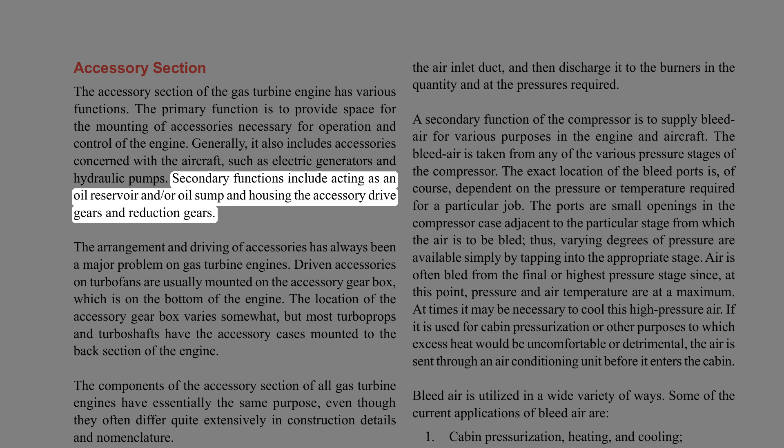Accessory Section. The accessory section of the gas turbine engine has various functions. The primary function is to provide space for mounting accessories necessary for operation and control of the engine. Generally, it also includes accessories concerned with the aircraft, such as electric generators and hydraulic pumps. Secondary functions include acting as an oil reservoir and/or oil sump and housing the accessory drive gears and reduction gears. The arrangement and driving of accessories has always been a major problem on gas turbine engines.

Driven accessories on turbofans are usually mounted on the accessory gearbox, located on the bottom of the engine. The location of the accessory gearbox varies somewhat, but most turboprops and turboshafts have the accessory cases mounted to the back section of the engine. The components of the accessory section of all gas turbine engines have essentially the same purpose, even though they often differ quite extensively in construction details and nomenclature.

The basic elements of the accessory section are the accessory case, which has machined mounting pads for the engine-driven accessories, and the gear train, housed within the accessory case. The accessory case may be designed to act as an oil reservoir. If an oil tank is utilized, a sump is usually provided below the front bearing support for the drainage and scavenging of oil used to lubricate bearings and drive gears.

The accessory case is also provided with adequate tubing or cored passages for spraying lubricating oil on the gear train and supporting bearings. The gear train is driven by the engine's high-pressure compressor through an accessory drive shaft, tower shaft, and gear coupling, which splines with a gearbox gear and the high-pressure compressor. The reduction gearing within the case provides suitable drive speeds for each engine accessory or component. Because the rotor operating RPM is so high, the accessory reduction gear ratios are relatively high. The accessory drives are supported by ball bearings assembled in the mounting pad bores of the accessory case.

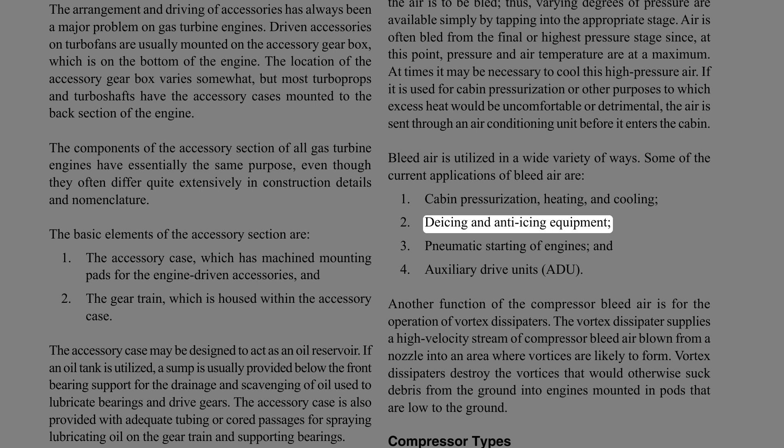Bleed air is utilized in a wide variety of ways. Some of the current applications of bleed air are cabin pressurization, heating and cooling, de-icing and anti-icing equipment, pneumatic starting of engines, and auxiliary drive units, ADU.

Another function of compressor bleed air is for the operation of vortex dissipators. The vortex dissipator supplies a high-velocity stream of compressor bleed air blown from a nozzle into an area where vortices are likely to form. Vortex dissipators destroy the vortices that would otherwise suck debris from the ground into engines mounted in pods that are low to the ground.

Compressor types: the two principal types of compressors currently being used in gas turbine aircraft engines are centrifugal flow and axial flow. The centrifugal flow compressor achieves its purpose by picking up the entering air and accelerating it outwardly by centrifugal action. The axial flow compressor compresses air while the air continues in its original direction of flow, thus avoiding the energy loss caused by turns.

The components of each of these two types of compressor have their individual functions in the compression of air for the combustion section. A stage in a compressor is considered to be a rise in pressure.

Centrifugal flow compressors: the centrifugal flow compressor consists of an impeller, rotor, a diffuser, stator, and a compressor manifold. Centrifugal compressors have a high pressure rise per stage that can be around 8 to 1. Generally, centrifugal compressors are limited to 2 stages due to efficiency concerns.

The two main functional elements are the impeller and the diffuser. Although the diffuser is a separate unit and is placed inside and bolted to the manifold, the entire assembly, diffuser and manifold, is often referred to as the diffuser. For clarification during compressor familiarization, the units are treated individually.

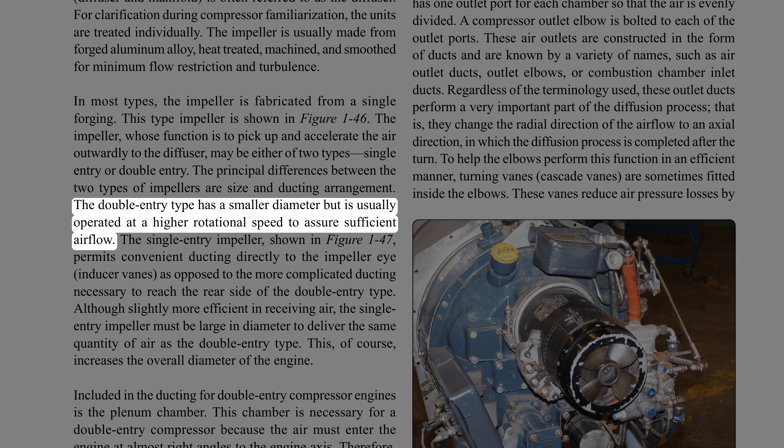The double entry type has a smaller diameter but is usually operated at a higher rotational speed to assure sufficient airflow. The single entry impeller, shown in Figure 1-47, permits convenient ducting directly to the impeller eye, inducer vanes, as opposed to the more complicated ducting necessary to reach the rear side of the double entry type. Although slightly more efficient in receiving air, the single entry impeller must be large in diameter to deliver the same quantity of air as the double entry type. This, of course, increases the overall diameter of the engine.

Included in the ducting for double entry compressor engines is the plenum chamber. This chamber is necessary for a double entry compressor because the air must enter the engine at almost right angles to the engine axis. Therefore, in order to give a positive flow, the air must surround the engine compressor at a positive pressure before entering.

Included in some installations as necessary parts of the plenum chamber are the auxiliary air intake doors, or blow-in doors. These blow-in doors admit air to the engine compartment during ground operation, when air requirements for the engine are in excess of the airflow through the inlet ducts.

The doors are held closed by spring action when the engine is not operating. During operation, however, the doors open automatically whenever engine compartment pressure drops below atmospheric pressure. During takeoff and flight, ram air pressure in the engine compartment aids the springs in holding the doors closed.

The diffuser is an annular chamber provided with a number of vanes forming a series of divergent passages into the manifold. The diffuser vanes direct the flow of air from the impeller to the manifold at an angle designed to retain the maximum amount of energy imparted by the impeller.

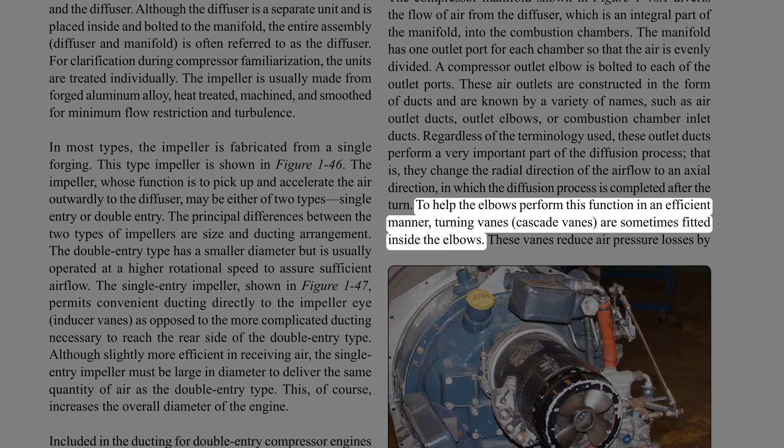They change the radial direction of the airflow to an axial direction, in which the diffusion process is completed after the turn. To help the elbows perform this function in an efficient manner, turning vanes, or cascade vanes, are sometimes fitted inside the elbows. These vanes reduce air pressure losses by presenting a smooth, turning surface. Figure 1-46b: Axial-Flow Compressor.

The axial-flow compressor is a combination of an engine compressor and high-pressure turbine that drives it using a connecting drive shaft. In a single-spool engine, the high-pressure turbine drives the entire compressor. In a dual-spool engine, the compressor and high-pressure turbine are both split into two segments. Each compressor segment is driven by its corresponding turbine using two separate drive shafts, with one inside the other. The first stage turbine drives the N2 compressor.

The axial-flow compressor has two main elements, a rotor and a stator. The rotor has blades fixed on a spindle. These blades impel air rearward in the same manner as a propeller because of their angle and airfoil contour. The rotor, turning at high speed, takes in air at the compressor inlet and impels it through a series of stages. From inlet to exit, the air flows along an axial path and is compressed at a ratio of approximately

1.25 to 1 per stage. The action of the rotor increases the compression of the air at each stage and accelerates it rearward through several stages. With this increased velocity, energy is transferred from the compressor to the air in the form of velocity energy. The stator blades act as diffusers at each stage, partially converting high velocity to pressure.

Each consecutive pair of rotor and stator blades constitutes a pressure stage. The number of rows of blades, or stages, is determined by the amount of air and total pressure rise required. Compressor pressure ratio increases with the number of compression stages. Most engines utilize up to 16 stages and more.

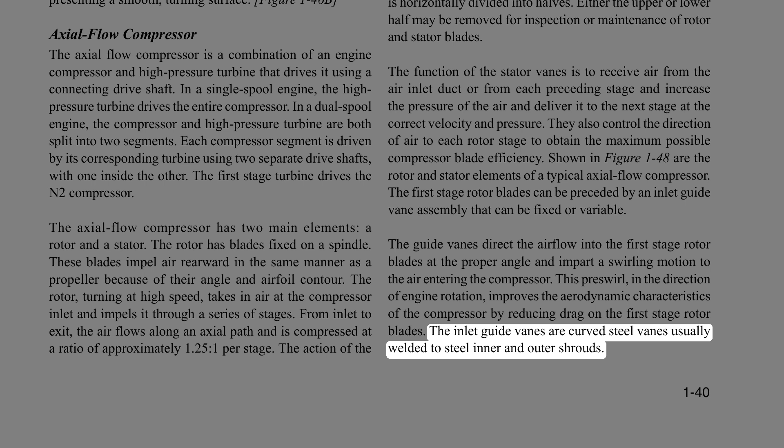At the discharge end of the compressor, the stator vanes are constructed to straighten the airflow to eliminate turbulence. These vanes are called straightening vanes or the outlet vane assembly. The casings of axial flow compressors not only support the stator vanes and provide the outer wall of the axial path the air follows, but they also provide the means for extracting compressor air for various purposes. The stator vanes are usually made of steel with corrosion and erosion-resistant qualities.

Quite frequently, they are shrouded or enclosed by a band of suitable material to simplify the fastening problem. The vanes are welded into the shrouds, and the outer shroud is secured to the compressor housing inner wall by radial retaining screws.

The rotor blades are usually made of stainless steel, with the latter stages made of titanium. The design of blade attachment to the rotor disc rims varies, but they are commonly fitted into discs by either bulb type or fir tree methods. The blades are then locked into place by differing methods.

Compressor blade tips are reduced in thickness by cutouts, referred to as blade profiles. These profiles prevent serious damage to the blade or housing should the blades contact the compressor housing. This condition can occur if rotor blades become excessively loose or if rotor support is reduced by a malfunctioning bearing. Even though blade profiles greatly reduce such possibilities, occasionally a blade may break under stress of rubbing and cause considerable damage to compressor blades and stator vane assemblies.

The blades vary in length from entry to discharge because the annular working space, drum to casing, is reduced progressively toward the rear by the decrease in the casing diameter. This feature provides for a fairly constant velocity through the compressor, which helps to keep the flow of air constant.

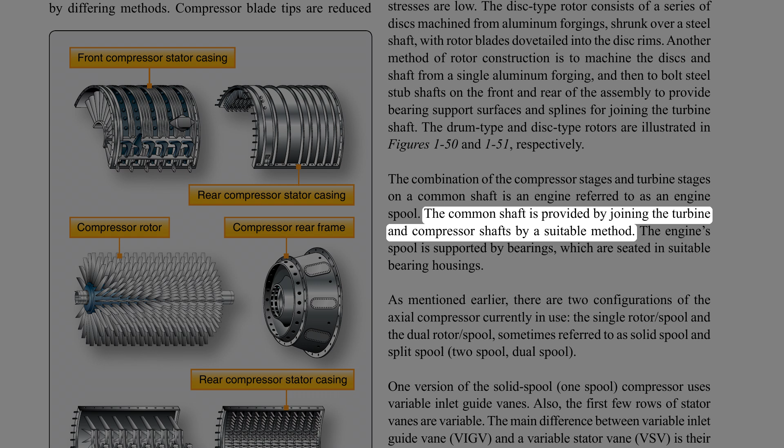The combination of the compressor stages and turbine stages on a common shaft is referred to as an engine spool. The common shaft is provided by joining the turbine and compressor shafts by a suitable method. The engine's spool is supported by bearings, which are seated in suitable bearing housings.

As mentioned earlier, there are two configurations of the axial compressor currently in use: the single rotor spool and the dual rotor spool, sometimes referred to as solid spool and split spool, two spool, dual spool.

One version of the solid spool, one spool, compressor uses variable inlet guide vanes. Also, the first few rows of stator vanes are variable. The main difference between variable inlet guide vane (VIGV) and variable stator vane (VSV) is their position with regard to the rotor blades. VIGV are in front of the rotor blades, and VSV are behind the rotor blades. The angles of the inlet guide vanes and the first several stages of the stator vanes can be variable.

During operation, air enters the front of the engine and is directed into the compressor at the proper angle by the variable inlet guide and directed by the VSV. The air is compressed and forced into the combustion section. A fuel nozzle that extends into each combustion liner atomizes the fuel for combustion. These variables are controlled in direct relation to the amount of power the engine is required to produce, by the power lever position.

Most turbofan engines are of the split spool compressor type. Most large turbofan engines use a large fan with a few stages of compression called the low-pressure spool. These turbofans incorporate two compressors with their respective turbines and interconnecting shafts, which form two physically independent rotor systems.

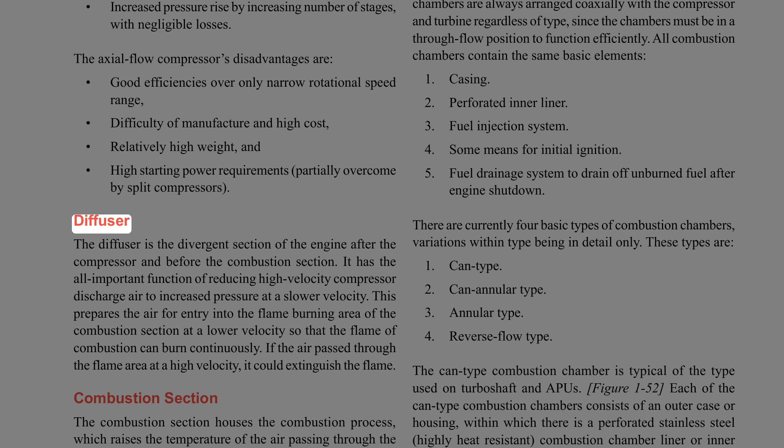The diffuser is the divergent section of the engine after the compressor and before the combustion section. It has the all-important function of reducing high-velocity compressor discharge air to increased pressure at a slower velocity. This prepares the air for entry into the flame-burning area of the combustion section at a lower velocity so that the flame of combustion can burn continuously. If the air passed through the flame area at a high velocity, it could extinguish the flame.

The combustion section houses the combustion process, which raises the temperature of the air passing through the engine. This process releases energy contained in the air-fuel mixture. The major part of this energy is required at the turbine or turbine stages to drive the compressor.

About two-thirds of the energy is used to drive the gas generator compressor. The remaining energy passes through the remaining turbine stages that absorb more of the energy to drive the fan, output shaft, or propeller. Only the pure turbojet allows the air to create all the thrust or propulsion by exiting the rear of the engine in the form of a high-velocity jet. These other engine types have some jet velocity out the rear of the engine, but most of the thrust or power is generated by the additional turbine stages driving a large fan, propeller, or helicopter rotor blades.

The primary function of the combustion section is, of course, to burn the air-fuel mixture, thereby adding heat energy to the air. To do this efficiently, the combustion chamber must provide the means for proper mixing of the fuel and air to assure good combustion, burn this mixture efficiently, cool the hot combustion products to a temperature that the turbine inlet guide vanes and blades can withstand under operating conditions, and deliver the hot gases to the turbine section.

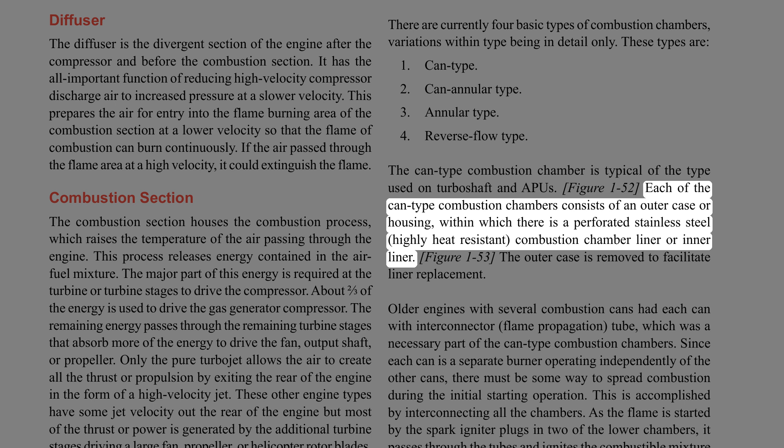The can-type combustion chamber is typical of the type used on turboshaft engines and APUs. Each of the can-type combustion chambers consists of an outer case or housing, within which there is a perforated stainless steel, highly heat-resistant combustion chamber liner or inner liner. The outer case is removed to facilitate liner replacement.

Older engines with several combustion cans had each can with an interconnector flame propagation tube, which was a necessary part of the can-type combustion chambers. Since each can is a separate burner operating independently of the other cans, there must be some way to spread combustion during the initial starting operation. This is accomplished by interconnecting all the chambers.

As the flame is started by the spark igniter plugs in 2 of the lower chambers, it passes through the tubes and ignites the combustible mixture in the adjacent chamber and continues until all the chambers are burning. The flame tubes vary in construction details from one engine to another, although the basic components are almost identical. The spark igniters previously mentioned are normally 2 in number and are located in 2 of the can-type combustion chambers.

Another very important requirement in the construction of combustion chambers is providing the means for draining unburned fuel. This drainage prevents gum deposits in the fuel manifold, nozzles, and combustion chambers. These deposits are caused by the residue left when the fuel evaporates.

Probably most important is the danger of after-fire if the fuel is allowed to accumulate after shutdown. If the fuel is not drained, a great possibility exists that, at the next starting attempt, the excess fuel in the combustion chamber will ignite and exhaust gas temperature will exceed safe operating limits.

The liners of the can-type combustors have perforations of various sizes and shapes, each hole having a specific purpose and effect on flame propagation within the liner. The air entering the combustion chamber is divided by the proper holes, louvers, and slots into 2 main streams, primary and secondary air. The primary or combustion air is directed inside the liner at the front end, where it mixes with the fuel and is burned.

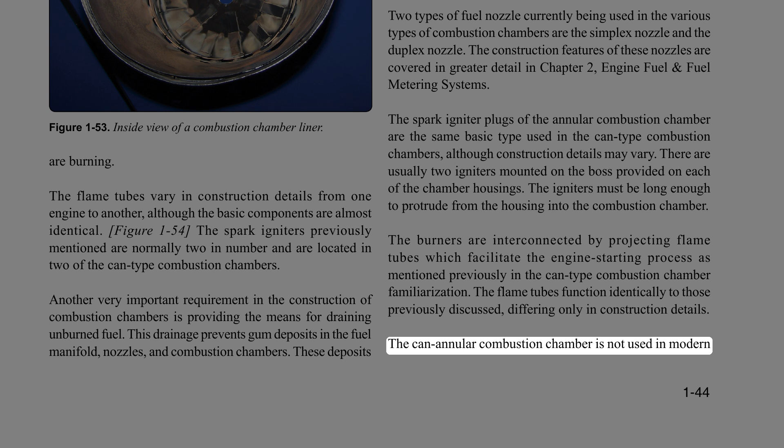The burners are interconnected by projecting flame tubes which facilitate the engine starting process, as mentioned previously in the can-type combustion chamber familiarization. The flame tubes function identically to those previously discussed, differing only in construction details. The can-annular combustion chamber is not used in modern engines.

The forward face of each chamber presents 6 apertures, which align with the 6 fuel nozzles of the corresponding fuel nozzle cluster. These nozzles are the dual orifice, duplex type, requiring the use of a flow divider, pressurizing valve, as mentioned in the can-type combustion chamber discussion.

Around each nozzle are pre-swirl vanes for imparting a swirling motion to the fuel spray, which results in better atomization of the fuel, better burning, and efficiency.

The swirl vanes function to provide 2 effects imperative to proper flame propagation: high flame speed, better mixing of air and fuel, ensuring spontaneous burning; and low air velocity axially, swirling eliminates overly rapid flame movement axially.

The swirl vanes greatly aid flame propagation, since a high degree of turbulence in the early combustion and cooling stages is desirable. The vigorous mechanical mixing of the fuel vapor with the primary air is necessary, since mixing by diffusion alone is too slow. This same mechanical mixing is also established by other means, such as placing coarse screens in the diffuser outlet, as is the case in most axial flow engines.

The can-annular combustion chambers also must have the required fuel drain valves located in 2 or more of the bottom chambers, assuring proper drainage and elimination of residual fuel burning at the next start.

The flow of air through the holes and louvers of the can-annular chambers is almost identical with the flow through other types of burners. Special baffling is used to swirl the combustion airflow and to give it turbulence. Figure 1-57 shows the flow of combustion air, metal cooling air, and the diluent or gas cooling air. The airflow direction is indicated by the arrows.

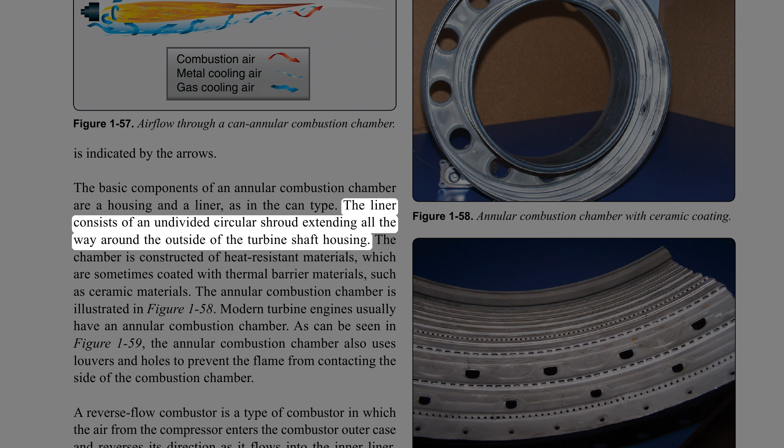The basic components of an annular combustion chamber are a housing and a liner, as in the can type. The liner consists of an undivided circular shroud extending all the way around the outside of the turbine shaft housing. The chamber is constructed of heat-resistant materials, which are sometimes coated with thermal barrier materials, such as ceramic materials.

The annular combustion chamber is illustrated in Figure 1-58. Modern turbine engines usually have an annular combustion chamber. As can be seen in Figure 1-59, the annular combustion chamber also uses louvers and holes to prevent the flame from contacting the side of the combustion chamber.

A reverse flow combustor is a type of combustor in which the air from the compressor enters the combustor outer case and reverses its direction as it flows into the inner liner. It again reverses its direction before it flows through the turbine. Reverse flow combustors are used where engine length is critical.

Turbine section: the turbine transforms a portion of the kinetic, velocity energy of the exhaust gases into mechanical energy to drive the gas generator compressor and accessories. The sole purpose of the gas generator turbine is to absorb approximately 60-70% of the total pressure energy from the exhaust gases.

The exact amount of energy absorption at the turbine is determined by the load the turbine is driving, i.e., compressor size and type, number of accessories, and the load applied by the other turbine stages. These turbine stages can be used to drive a low-pressure compressor, fan, propeller, and shaft.

The turbine section of a gas turbine engine is located aft, or downstream, of the combustion chamber. Specifically, it is directly behind the combustion chamber outlet.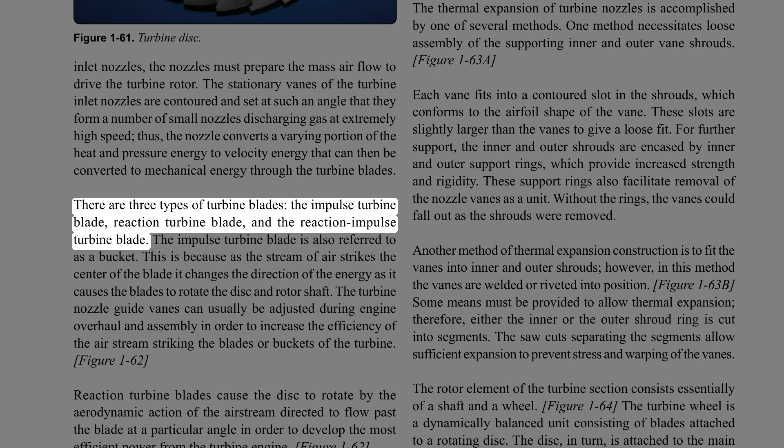There are 3 types of turbine blades: the impulse turbine blade, reaction turbine blade, and the reaction impulse turbine blade. The impulse turbine blade is also referred to as a bucket. This is because as the stream of air strikes the center of the blade, it changes the direction of the energy as it causes the blades to rotate the disc and rotor shaft.

The turbine nozzle guide vanes can usually be adjusted during engine overhaul and assembly in order to increase the efficiency of the airstream striking the blades or buckets of the turbine.

Reaction turbine blades cause the disc to rotate by the aerodynamic action of the airstream directed to flow past the blade at a particular angle in order to develop the most efficient power from the turbine engine.

The reaction impulse turbine blade combines the action of both the impulse and reaction blade designs. The blade has more of the bucket shape of the impulse blade at the blade root, and it also has more of an airfoil shape of the reaction blade on the second half of the blade toward the outer end of the blade.

The second purpose of the turbine inlet nozzle is to deflect the gases to a specific angle in the direction of turbine wheel rotation. Since the gas flow from the nozzle must enter the turbine blade passageway while it is still rotating, it is essential to aim the gas in the general direction of turbine rotation.

The turbine inlet nozzle assembly consists of an inner shroud and an outer shroud between which the nozzle vanes are fixed. The number and size of inlet vanes employed vary with different types and sizes of engines. Figure 1-63 illustrates typical turbine inlet nozzles featuring loose and welded vanes.

The vanes of the turbine inlet nozzle may be assembled between the outer and inner shrouds or rings in a variety of ways. Although the actual elements may vary slightly in configuration and construction features, there is one characteristic peculiar to all turbine inlet nozzles: the nozzle vanes must be constructed to allow thermal expansion. Otherwise, there would be severe distortion or warping of the metal components because of rapid temperature changes.

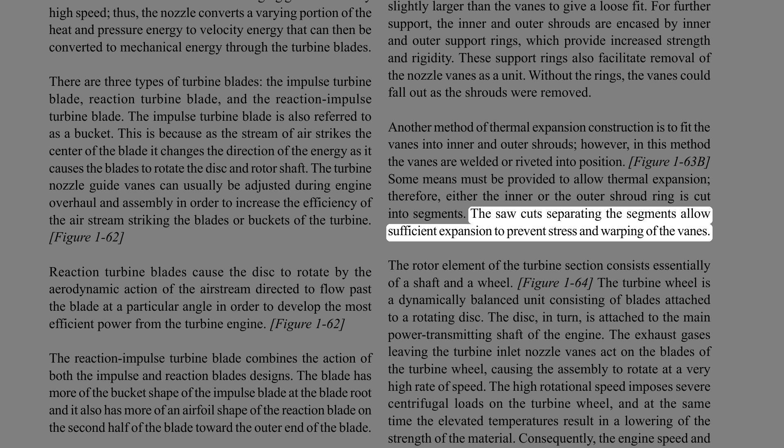The saw cuts separating the segments allow sufficient expansion to prevent stress and warping of the vanes.

The rotor element of the turbine section consists essentially of a shaft and a wheel. The turbine wheel is a dynamically balanced unit consisting of blades attached to a rotating disc. The disc, in turn, is attached to the main power transmitting shaft of the engine.

The exhaust gases leaving the turbine inlet nozzle vanes act on the blades of the turbine wheel, causing the assembly to rotate at a very high rate of speed. The high rotational speed imposes severe centrifugal loads on the turbine wheel, and at the same time the elevated temperatures result in a lowering of the strength of the material. Consequently, the engine speed and temperature must be controlled to keep turbine operation within safe limits.

The turbine disc is referred to as such without blades. When the turbine blades are installed, the disc then becomes the turbine wheel. The disc acts as an anchoring component for the turbine blades. Since the disc is bolted or welded to the shaft, the blades can transmit to the rotor shaft the energy they extract from the exhaust gases.

The disc rim is exposed to the hot gases passing through the blades and absorbs considerable heat from these gases. In addition, the rim also absorbs heat from the turbine blades by conduction. Hence, disc rim temperatures are normally high and well above the temperatures of the more remote inner portion of the disc. As a result of these temperature gradients, thermal stresses are added to the rotational stresses. Additionally, turbine blades are generally more susceptible to operating damage than compressor blades due to the exposure of high temperatures.

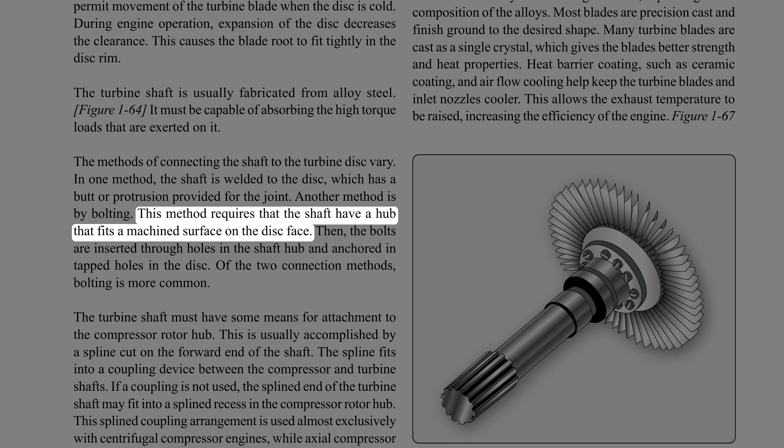Another method is by bolting. This method requires that the shaft have a hub that fits a machined surface on the disc face. Then, the bolts are inserted through holes in the shaft hub and anchored in tapped holes in the disc. Of the two connection methods, bolting is more common.

The turbine shaft must have some means for attachment to the compressor rotor hub. This is usually accomplished by a spline cut on the forward end of the shaft. The spline fits into a coupling device between the compressor and turbine shafts. If a coupling is not used, the splined end of the turbine shaft may fit into a splined recess in the compressor rotor hub. This splined coupling arrangement is used almost exclusively with centrifugal compressor engines, while axial compressor engines may use either of these described methods.

There are various ways of attaching turbine blades, some similar to compressor blade attachment. The most satisfactory method utilizes the fir tree design. The blades are retained in their respective grooves by a variety of methods, the more common of which are peening, welding, lock tabs, and riveting. Figure 1-66 shows a typical turbine wheel using rivets for blade retention.

The peening method of blade retention is used frequently in various ways. One of the most common applications of peening requires a small notch to be ground in the edge of the blade fir tree root prior to the blade installation. After the blade is inserted into the disc, the notch is filled by the disc metal, which is flowed into it by a small punch mark made in the disc adjacent to the notch. The tool used for this job is similar to a center punch.

Another method of blade retention is to construct the root of the blade so that it contains all the elements necessary for its retention.

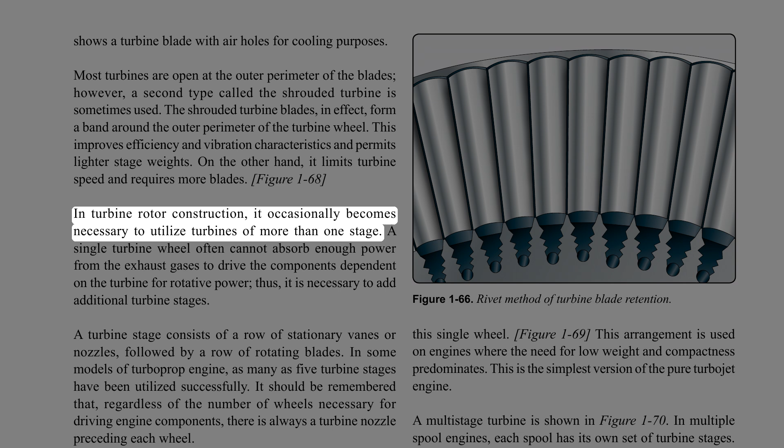In turbine rotor construction, it occasionally becomes necessary to utilize turbines of more than one stage. A single turbine wheel often cannot absorb enough power from the exhaust gases to drive the components dependent on the turbine for rotative power. Thus, it is necessary to add additional turbine stages. A turbine stage consists of a row of stationary vanes or nozzles, followed by a row of rotating blades. In some models of turboprop engine, as many as 5 turbine stages have been utilized successfully. It should be remembered that, regardless of the number of wheels necessary for driving engine components, there is always a turbine nozzle preceding each wheel.

As was brought out in the preceding discussion of turbine stages, the occasional use of more than one turbine wheel is warranted in cases of heavy rotational loads. It should also be pointed out that the same loads that necessitate multi-stage turbines often make it advantageous to incorporate multiple compressor rotors. In the single-stage rotor turbine, the power is developed by one turbine rotor, and all engine-driven parts are driven by this single wheel. This arrangement is used on engines where the need for low weight and compactness predominates. This is the simplest version of the pure turbojet engine.

A multi-stage turbine is shown in Figure 1-70. In multiple spool engines, each spool has its own set of turbine stages. Each set of turbine stages turns the compressor attached to it. Most turbofan engines have 2 spools: a low pressure fan shaft with a few stages of compression and the turbine to drive it, and a high pressure compressor shaft and high pressure turbine. The remaining element to be discussed concerning turbine familiarization is the turbine casing or housing.

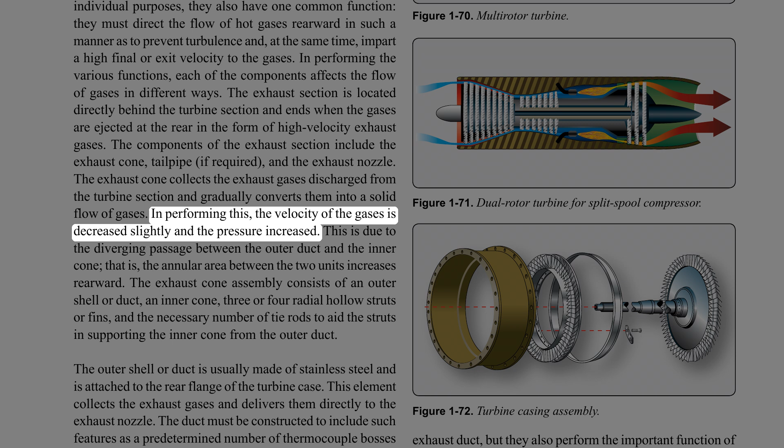The components of the exhaust section include the exhaust cone, tailpipe if required, and the exhaust nozzle. The exhaust cone collects the exhaust gases discharged from the turbine section and gradually converts them into a solid flow of gases. In performing this, the velocity of the gases is decreased slightly and the pressure increased. This is due to the diverging passage between the outer duct and the inner cone, that is, the annular area between the two units increases rearward.

The exhaust cone assembly consists of an outer shell or duct, an inner cone, 3 or 4 radial hollow struts or fins, and the necessary number of tie rods to aid the struts in supporting the inner cone from the outer duct. The outer shell or duct is usually made of stainless steel and is attached to the rear flange of the turbine case. This element collects the exhaust gases and delivers them directly to the exhaust nozzle.

The duct must be constructed to include such features as a predetermined number of thermocouple bosses for installing exhaust temperature thermocouples, and there must also be insertion holes for the supporting tie rods. In some cases, tie rods are not used for supporting the inner cone. If such is the case, the hollow struts provide the sole support of the inner cone, the struts being spot welded in position to the inside surface of the duct and to the inner cone, respectively.

The radial struts actually have a twofold function. They not only support the inner cone in the exhaust duct, but they also perform the important function of straightening the swirling exhaust gases that would otherwise leave the turbine at an angle of approximately 45 degrees. The centrally located inner cone fits rather closely against the rear face of the turbine disc, preventing turbulence of the gases as they leave the turbine wheel. The cone is supported by the radial struts.

In some configurations, a small hole is located in the exit tip of the cone. This hole allows cooling air to be circulated from the aft end of the cone, where the pressure of the gases is relatively high, into the interior of the cone and consequently against the face of the turbine wheel. The flow of air is positive, since the air pressure at the turbine wheel is relatively low due to rotation of the wheel, thus air circulation is assured. The gases used for cooling the turbine wheel return to the main path of flow by passing through the clearance between the turbine disc and the inner cone.

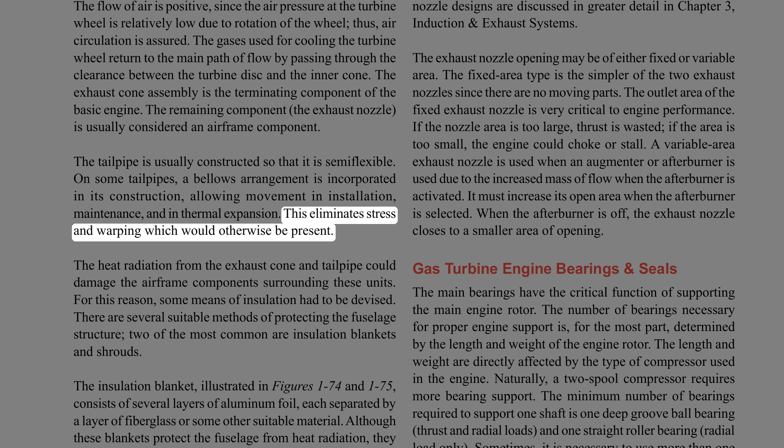The exhaust cone assembly is the terminating component of the basic engine. The remaining component, the exhaust nozzle, is usually considered an airframe component. The tailpipe is usually constructed so that it is semi-flexible. On some tailpipes, a bellows arrangement is incorporated in its construction, allowing movement in installation, maintenance, and in thermal expansion. This eliminates stress and warping which would otherwise be present.

The heat radiation from the exhaust cone and tailpipe could damage the airframe components surrounding these units. For this reason, some means of insulation had to be devised. There are several suitable methods of protecting the fuselage structure. Two of the most common are insulation blankets and shrouds.

The insulation blanket, illustrated in figures 1-74 and 1-75, consists of several layers of aluminum foil, each separated by a layer of fiberglass or some other suitable material. Although these blankets protect the fuselage from heat radiation, they are used primarily to reduce heat loss from the exhaust system. The reduction of heat loss improves engine performance.

There are two types of exhaust nozzle designs: the converging design for subsonic gas velocities and the converging-diverging design for supersonic gas velocities. These exhaust nozzle designs are discussed in greater detail in Chapter 3, Induction and Exhaust Systems. The exhaust nozzle opening may be of either fixed or variable area. The fixed area type is the simpler of the two exhaust nozzles since there are no moving parts. The outlet area of the fixed exhaust nozzle is very critical to engine performance. If the nozzle area is too large, thrust is wasted. If the area is too small, the engine could choke or stall.

A variable area exhaust nozzle is used when an augmenter or afterburner is used due to the increased mass of flow when the afterburner is activated. It must increase its open area when the afterburner is selected. When the afterburner is off, the exhaust nozzle closes to a smaller area of opening.

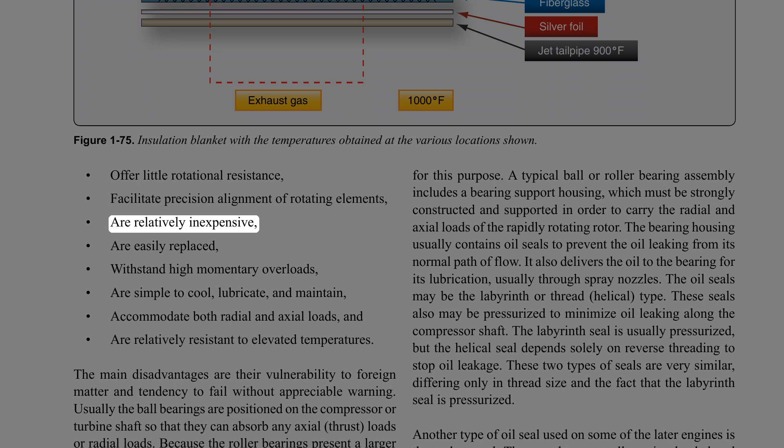In general, anti-friction bearings are preferred largely because they offer little rotational resistance, facilitate precision alignment of rotating elements, are relatively inexpensive, are easily replaced, withstand high momentary overloads, are simple to cool, lubricate, and maintain, accommodate both radial and axial loads, and are relatively resistant to elevated temperatures.

The main disadvantages are their vulnerability to foreign matter and tendency to fail without appreciable warning. Usually the ball bearings are positioned on the compressor or turbine shaft so that they can absorb any axial, thrust, or radial loads. Because roller bearings present a larger working surface, they are better equipped to support radial loads than thrust loads, so they are used primarily for this purpose.

A typical ball or roller bearing assembly includes a bearing support housing, which must be strongly constructed and supported in order to carry the radial and axial loads of the rapidly rotating rotor.

The bearing housing usually contains oil seals to prevent oil leaking from its normal path of flow. It also delivers oil to the bearing for lubrication, usually through spray nozzles. The oil seals may be the labyrinth or thread, helical type, and may also be pressurized to minimize oil leaking along the compressor shaft. The labyrinth seal is usually pressurized, but the helical seal depends solely on reverse threading to stop oil leakage.

These two types of seals are very similar, differing only in thread size and the fact that the labyrinth seal is pressurized. Another type of oil seal used on some later engines is the carbon seal. These seals are usually spring-loaded and similar in material and application to the carbon brushes used in electrical motors. Carbon seals rest against a surface provided to create a sealed bearing cavity or void, thus preventing oil from leaking out along the shaft into the compressor airflow or turbine section.

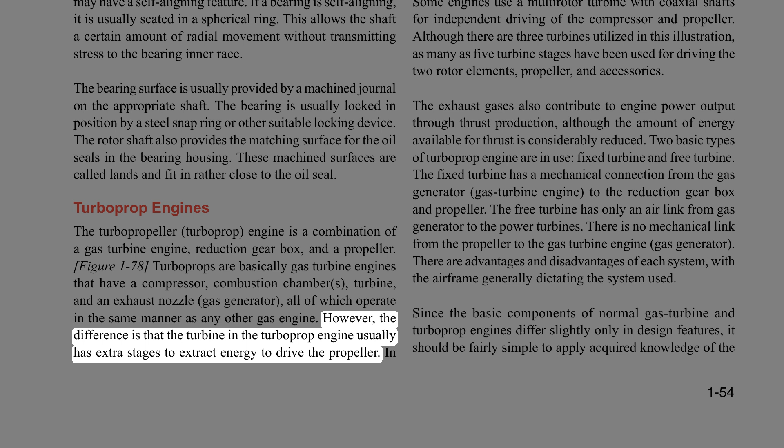In addition to operating the compressor and accessories, the turboprop turbine transmits increased power forward through a shaft and a gear train to drive the propeller. This increased power is generated by the exhaust gases passing through additional stages of the turbine.

Some engines use a multirotor turbine with coaxial shafts for independent driving of the compressor and propeller. Although there are 3 turbines utilized in this illustration, as many as 5 turbine stages have been used for driving the 2 rotor elements, propeller, and accessories. The exhaust gases also contribute to engine power output through thrust production, although the amount of energy available for thrust is considerably reduced.

Two basic types of turboprop engine are in use: fixed turbine and free turbine. The fixed turbine has a mechanical connection from the gas generator, the gas turbine engine, to the reduction gearbox and propeller. The free turbine has only an air link from gas generator to the power turbines, with no mechanical link from the propeller to the gas turbine engine, the gas generator. There are advantages and disadvantages of each system, with the airframe generally dictating the system used.

Since the basic components of normal gas turbine and turboprop engines differ only slightly in design features, it should be fairly simple to apply acquired knowledge of the basic gas turbine to the turboprop. The typical turboprop engine can be broken down into assemblies as follows: the power section assembly contains the usual major components of a gas turbine engine, i.e., compressor, combustion chamber, turbine, and exhaust sections. The reduction gear or gearbox assembly contains those sections unique to turboprop configurations.

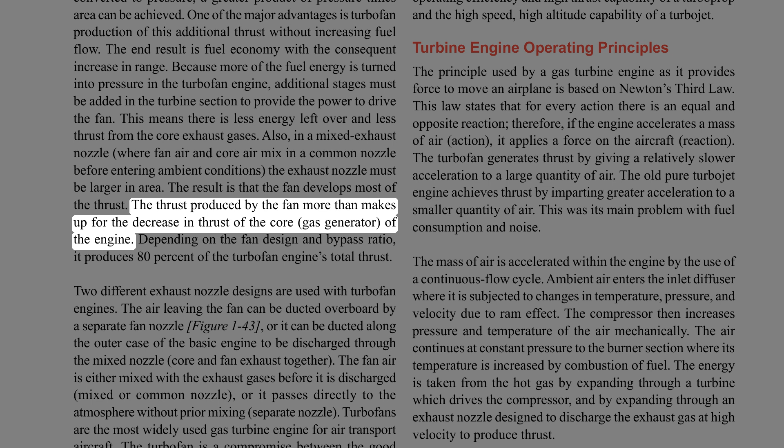The result is that the fan develops most of the thrust. The thrust produced by the fan more than makes up for the decrease in thrust of the core, the gas generator, of the engine. Depending on the fan design and bypass ratio, it produces 80% of the turbofan engine's total thrust.

Two different exhaust nozzle designs are used with turbofan engines. The air leaving the fan can be ducted overboard by a separate fan nozzle, or it can be ducted along the outer case of the basic engine to be discharged through the mixed nozzle, core and fan exhaust together. The fan air is either mixed with the exhaust gases before it is discharged, a mixed or common nozzle, or it passes directly to the atmosphere without prior mixing, a separate nozzle.

Turbofans are the most widely used gas turbine engine for air transport aircraft. The turbofan is a compromise between the good operating efficiency and high thrust capability of a turboprop and the high speed, high altitude capability of a turbojet.

Turbine engine operating principles: the principle used by a gas turbine engine as it provides force to move an airplane is based on Newton's third law. This law states that for every action there is an equal and opposite reaction. Therefore, if the engine accelerates a mass of air, action, it applies a force on the aircraft, reaction.

The turbofan generates thrust by giving a relatively slower acceleration to a large quantity of air. The old pure turbojet engine achieves thrust by imparting greater acceleration to a smaller quantity of air. This was its main problem with fuel consumption and noise.

The mass of air is accelerated within the engine by the use of a continuous flow cycle. Ambient air enters the inlet diffuser where it is subjected to changes in temperature, pressure, and velocity due to ram effect. The compressor then increases the pressure and temperature of the air mechanically.

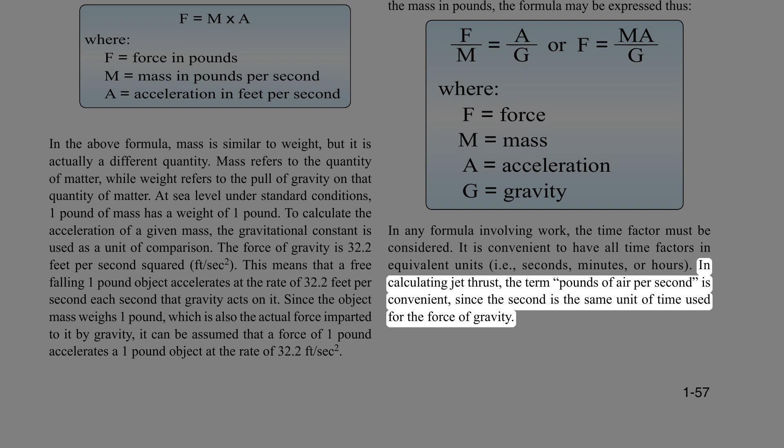In any formula involving work, the time factor must be considered. It is convenient to have all time factors in equivalent units, i.e., seconds, minutes, or hours. In calculating jet thrust, the term pounds of air per second is convenient, since the second is the same unit of time used for the force of gravity.

Thrust: using the following formula, compute the force necessary to accelerate a mass of 50 pounds by 100 feet per second. This illustrates that if the velocity mass per second is increased by 100, the resulting thrust is 155 pounds.

Since the turbojet engine accelerates air, the following formula can be used to determine jet thrust. As an example, to use the formula for changing the velocity of 100 pounds of mass airflow per second from 600 feet per second to 800 feet per second, the formula can be applied as follows. As shown by the formula, if the mass airflow per second and the difference in the velocity of the air from the intake to the exhaust are known, it is easy to compute the force necessary to produce the change in velocity. Therefore, the thrust of the engine must equal the force required to accelerate the air mass through the engine. Using the symbol Fn for thrust in pounds, the formula becomes...

Thrust of a gas turbine engine can be increased by two methods: increasing the mass flow of air through the engine, or increasing the gas velocity. If the velocity of the turbojet engine remains constant with respect to the aircraft, thrust decreases if the speed of the aircraft is increased. This is because V1 increases in value. This does not present a serious problem, however, because as aircraft speed increases, more air enters the engine, and jet velocity increases. The resultant net thrust is almost constant with increased airspeed.

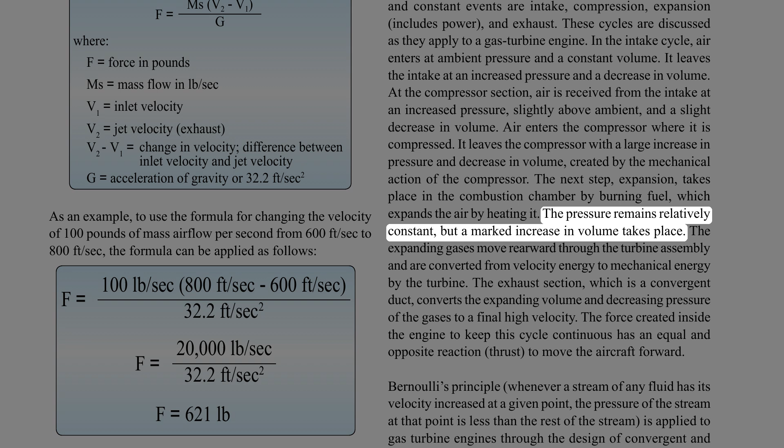The next step, expansion, takes place in the combustion chamber by burning fuel, which expands the air by heating it. The pressure remains relatively constant, but a marked increase in volume takes place. The expanding gases move rearward through the turbine assembly and are converted from velocity energy to mechanical energy by the turbine. The exhaust section, which is a convergent duct, converts the expanding volume and decreasing pressure of the gases to a final high velocity. The force created inside the engine to keep this cycle continuous has an equal and opposite reaction, thrust, to move the aircraft forward.

Bernoulli's principle, whenever a stream of any fluid has its velocity increased at a given point, the pressure of the stream at that point is less than the rest of the stream, is applied to gas turbine engines through the design of convergent and divergent air ducts. The convergent duct increases velocity and decreases pressure. The divergent duct decreases velocity and increases pressure. The convergent principle is usually used for the exhaust nozzle. The divergent principle is used in the compressor and diffuser, where the air is slowing and pressurizing.

Gas turbine engine performance: thermal efficiency is a prime factor in gas turbine performance. It is the ratio of net work produced by the engine to the chemical energy supplied in the form of fuel.

The three most important factors affecting thermal efficiency are turbine inlet temperature, compression ratio, and the component efficiencies of the compressor and turbine. Other factors that affect thermal efficiency are compressor inlet temperature and combustion efficiency. Figure 1-81 shows the effect that changing compression ratio, or compressor pressure ratio, has on thermal efficiency when compressor inlet temperature and the component efficiencies of the compressor and turbine remain constant.

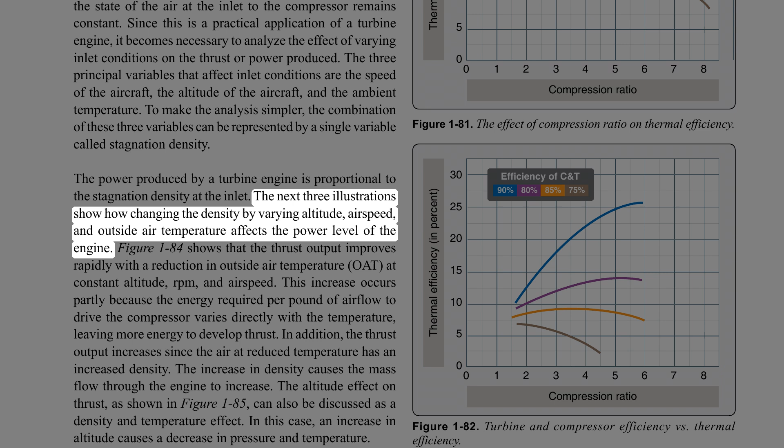The next three illustrations show how changing the density by varying altitude, airspeed, and outside air temperature affects the power level of the engine. Figure 1-84 shows that the thrust output improves rapidly with a reduction in outside air temperature, OAT, at constant altitude, RPM, and airspeed. This increase occurs partly because the energy required per pound of airflow to drive the compressor varies directly with the temperature, leaving more energy to develop thrust. In addition, the thrust output increases since the air at reduced temperature has an increased density. The increase in density causes the mass flow through the engine to increase.

The altitude effect on thrust, as shown in Figure 1-85, can also be discussed as a density and temperature effect. In this case, an increase in altitude causes a decrease in pressure and temperature. Since the temperature lapse rate is lower than the pressure lapse rate as altitude is increased, the density is decreased. Although the decreased temperature increases thrust, the effect of decreased density more than offsets the effect of the colder temperature. The net result of increased altitude is a reduction in the thrust output.

The effect of airspeed on the thrust of a gas turbine engine is shown in Figure 1-86. To explain the airspeed effect, it is necessary to understand first the effect of airspeed on the factors that combine to produce net thrust: specific thrust and engine airflow. Specific thrust is the net thrust in pounds developed per pound of airflow per second. It is the remainder of specific gross thrust minus specific ram drag.

As airspeed is increased, ram drag increases rapidly. The exhaust velocity remains relatively constant, thus the effect of the increase in airspeed results in decreased specific thrust. In the low speed range, the specific thrust decreases faster than the airflow increases and causes a decrease in net thrust. As the airspeed increases into the higher range, the airflow increases faster than the specific thrust decreases and causes the net thrust to increase until sonic velocity is reached. The effect of the combination on net thrust is illustrated in Figure 1-87.